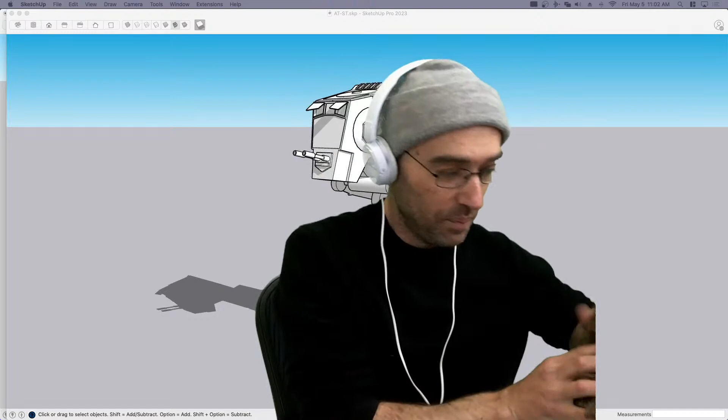We already have a lot of people in the chat here with us. We got people from sunny places like Syria, rainy places like Vancouver - is that Portland, Transom? Welcome Oregon, Transom, you're always our friend from the rainy Pacific Northwest. Anyone else we know? Some new faces, Washington, we've got all kinds of people. Matt's here - there's a lot of familiar faces in the crowd today.

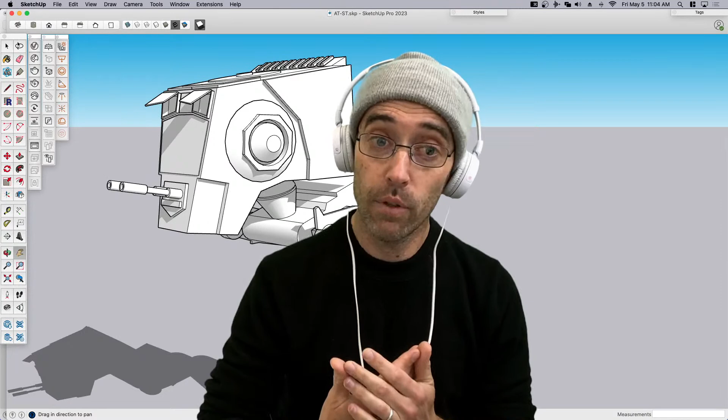So this is what we're going to do - we're going to pick up from here. And I'm less of a traditional modeler, more of a storyteller. So what I want to do today is create a scene inspired by Return of the Jedi, because this past month was the 40th anniversary of Return of the Jedi's theatrical release. So I'm getting old - I remember I was born, I was young, but I was alive when that happened.

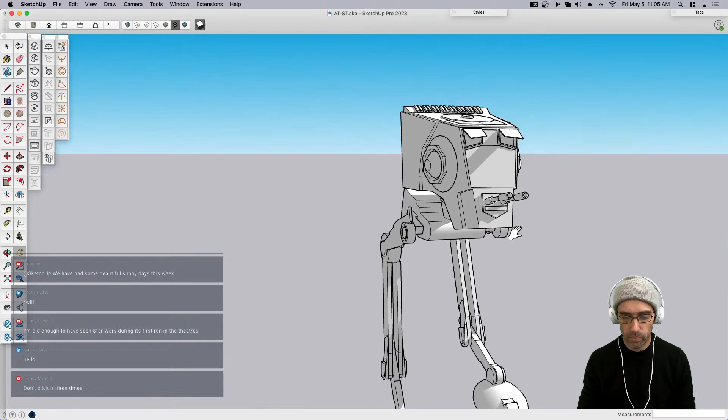So let's see, where do we want to start? Some people coming in from Mexico, Ethiopia, Iran - we have an international audience today. Randy on YouTube says, 'I'm old enough to have seen Star Wars during its first run in theaters.' Whoa.

Yeah, I did want to catch the re-release. They did release Return of the Jedi in some theaters, and leading up to this, I watched A New Hope and then Empire Strikes Back. And then I hadn't gotten to Return of the Jedi - I guess part of me was like, I don't want to watch it on the small screen, I want it on the big screen. So I'm still hoping I can do that.

Hopefully today just kind of re-energizes that passion to go out and make that commitment and get out of the house for a little bit and go do that.

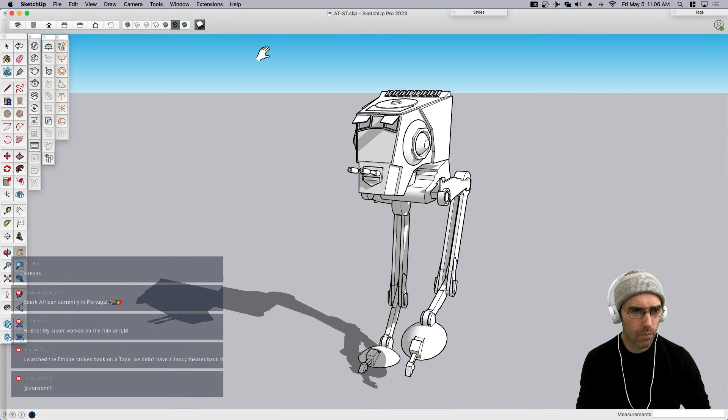Oh, that reminds me, I was going to say this. For those that don't know, I actually wanted to go to film school, not realizing you don't go to film school to work at ILM - you go to art school, engineering, landscape architecture, or architecture. Because those guys, when you watch documentaries of Industrial Light and Magic in those early days, I just thought that's got to be the most exciting job. I also graduated high school right as the Matrix was coming out - Jurassic Park already out in 1993, Toy Story '95, the Matrix in '99. Computer graphics by that point had pretty much taken over by the time I graduated high school. So my dream to do it the old school way, like those real rebels, the ILM folks, yeah, didn't get to do that.

But anyway, that's why I get to do it here, get to do it with you, get to do it in SketchUp. Keeping the dream alive, keeping the dream alive.

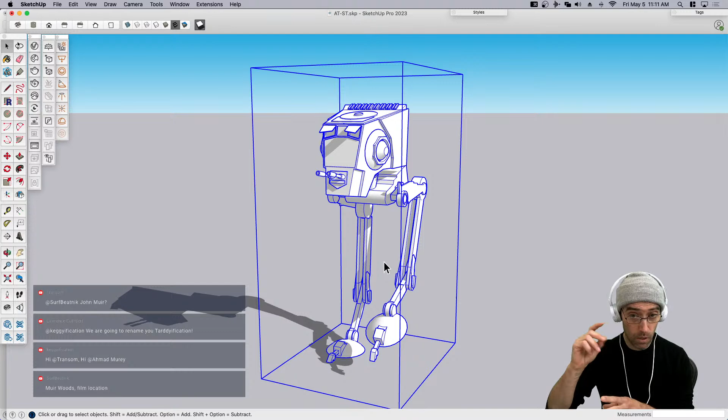But one thing, especially when we go to rendering, is that we're already missing materials, and I thought about that. I want to show you a couple of quick tests, I want to see what you think. And then I want to show you a different method I thought about in that hour leading up to this stream.

So let's do this, let's start by copying a couple of these over. The reason why I'm starting with rendering is because it's going to tell me how much work I need to do to get this model ready, so I can check that off the list and then move to the environment.

I want to start with Aaron's model out of respect for the fact that we're carrying his work into this stream. So there you go. In V-Ray, for those that don't know, the latest version of V-Ray moved their materials into Cosmos, which is their cloud library. So I'm going to type in iron.

I remember that's one that I used in the past, and there's one called Iron Dirty. What I want to do is import that, and now I just click on that. Now it shows up in my V-Ray window, so when I go to my asset editor, it's going to show up—and there it is, Iron Dirty.

So I'm just going to right click and say apply to selection. And there it is, Iron Dirty—it's applied. Now that was fast, that's literally quick and dirty to try and add like a metal texture to this.

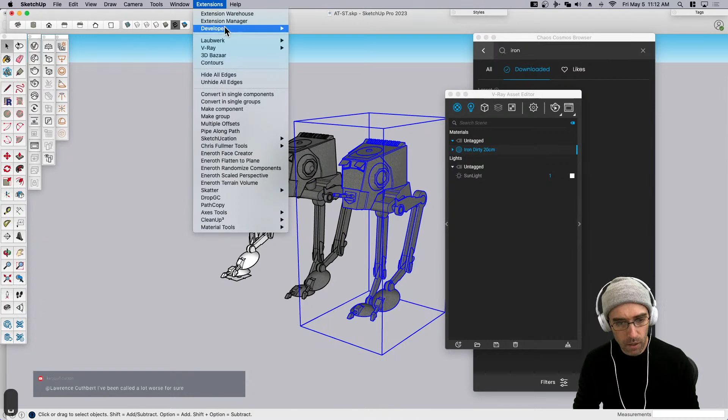I want to try one more just for comparison, just to kind of see. I'm not quite sure what's going to work, and I'm not sold.

I'm going to use my extension—one of my favorite extensions actually is ThomThom's Material Tools. It's because I can just click remove some from selection and it wipes everything out. It doesn't matter if it's got 100 materials nested, it just wipes everything out. I do that all the time when rendering—I just wipe out whatever's there and reapply it myself. Pro tip, all right.

Over here, if I type in just metal, I know there's some metals that are weathered. I want to find something that's kind of weathered a little bit. Like here's one and here's one. I don't know what's going to work, let's just try it. We have this selected, you'll notice I pre-select this before I even choose my material, so then I can just come over here and say apply to selection. That's how fast I can apply material. Let's see what that looks like.

We got some clarification in the YouTube comments saying that the film was in Muir Woods. Am I saying that right? Muir? Yeah, Muir. John Muir was kind of an explorer, pretty instrumental in the West for outdoors and hiking and trail stuff. Okay, so I want to match a viewport. Sorry, it's hard, I'm thinking and talking at the same time. Yeah, love it, keep those facts coming.

What I'm doing is I have this little standard setup in V-Ray. Whenever I have a blank file, I'll come into global illumination, expand the advanced settings, turn on ambient occlusion, maybe bump that up if I feel like pushing it for something more stylized. Then, unless I know what my composition is, it's easier to match my viewport than to have something different from it. Lastly, I bring my quality slider down, turn my denoiser on, and switch the denoiser preset to mild, so I do 2 or 3. I just do those 3 things every single time I set up a V-Ray.

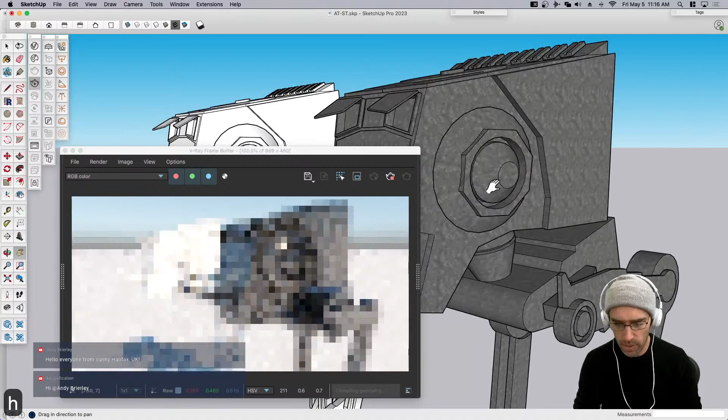If I come over here to this iron material, these are the best ones I could think of without spending a ton of time. This iron material is kind of cool—same thing, it's a little dark, a little smooth, a little too shiny. We can pull that back if we wanted to.

What I wanted to do is make the case that beyond these two metals V-Ray gives you, to do this properly we'd go to Substance Painter or something like that. But we're not going to do that today. If you look at the movie, there's all kinds of cables and cords and bolts and things that Aaron wouldn't spend time modeling.

So right before this stream I thought, is there a way I could shortcut that process? I watched a YouTube video of a guy painting a physical model, showing how to paint it, and I loved that grunge—the streaks, the little chipped paint, that weathered look. So what I did is I just cheated.

I did a screenshot of the front of it, then another screenshot, and matched it up. I essentially took an elevation view of Aaron's model and lined up the screenshots so you can see what that looks like. If I pull up in this image, there's the leg, there's the texture—just me grabbing a screenshot from a physical model and positioning it, aligning it with where it would sit on Aaron's model.

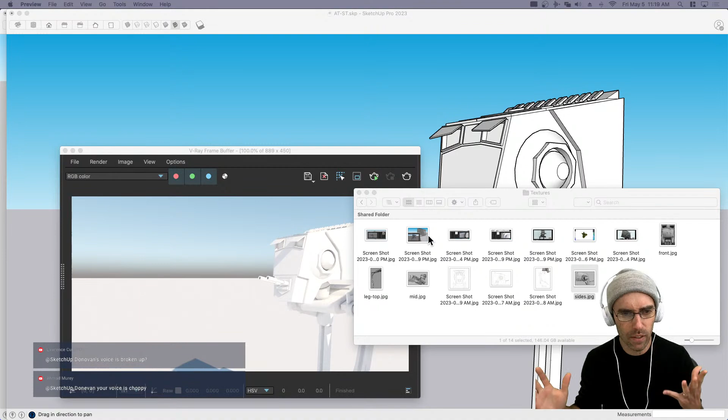What did Aaron say—is he giving me a hard time already? I'm just getting started. I think he's giving himself a hard time—he was saying it's a shame you don't have a better model to work with.

No, I'm saying this is perfectly fine, but to render, we need more information. For rendering, more is better. For SketchUp, for modeling, usually keep it light and nimble—rendering loves more detail. So I'm spending way too much time on this.

I just want to get into this, wrap this part up, and get right into modeling the environment. So here's his same model, and let me show you what I did to it. I just took those screenshots—I don't think it's great, it was just using the parallel projection.

If you go in here, turn your hidden geometry on, right click it, and say texture, texture position—there it is. All I did was take that same screenshot, line it up, and scale it best I could. Does it match perfectly? Of course it does not. But from a distance, if this is going to be in the back...

Let's render that really quick and see what that looks like. So you can see here's that render now. If that's going to be in the back, I don't know—I think it works, I hope it works. We're going to use it anyway.

So Aaron, what do you think—is that okay? Do I get your permission to use it, to go this route? Okay, I'm going to go this route anyway. I hope I get his permission. So that's it, we're going to go for it.

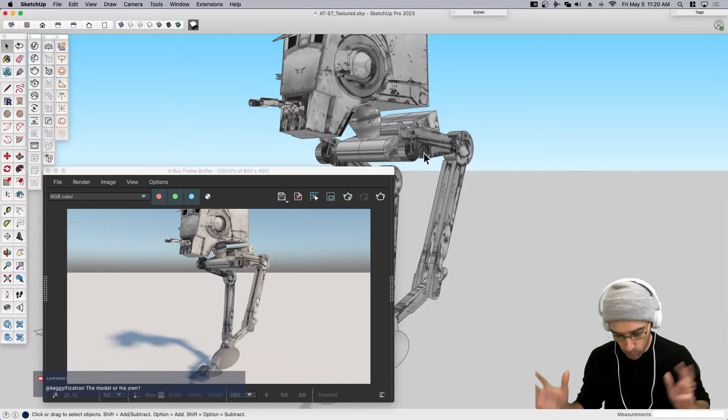I'm going to close V-Ray for now—we're going to pop back into that. So we need to think about, again, I haven't done any thinking, that was as far as my thinking went. The other thing I did was I grabbed some stormtroopers, which we're going to get to in just a second.

So if I go to 3D Warehouse, there was a file here today. All I did was grab some stormtroopers because I wasn't going to model those. I looked around, and to be honest it was kind of hard to find good ones. I found a few, got the scout trooper, a couple of scouts, a couple of stormtroopers, and one that's a desert trooper. I don't think he needs to be in the scene, but they did put him here. So, yeah, okay.

That's it, I'm gonna come back to these when we need them. That's all I did. I haven't done any pre-prep. I have no idea how I'm gonna do this.

Field of view, let me double check this. 35, that's good, but I like to work a little wider. I'm gonna push that to 50 for right now and just see what that does.

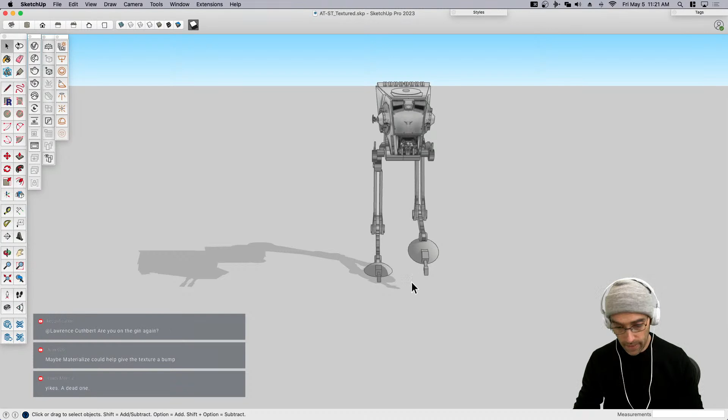You can see that. So I'm gonna start with creating an environment for how big of a scene, assuming that the chicken walker is sort of in the middle of the scene. I don't know how much I'm going to need to render, but using fog and some camera tricks may be a way.

Oh, Aaron, I did add this. I added a gun, and since Aaron did such a great job modeling this as components, he only modeled half of it. I could just come into this component and paste that in place, and then that gun shows up on both sides. So I did add that, I felt like it was missing.

And so Aaron, yeah, more guns, right? More guns, this is the United States of America. More guns. That was sarcastic.

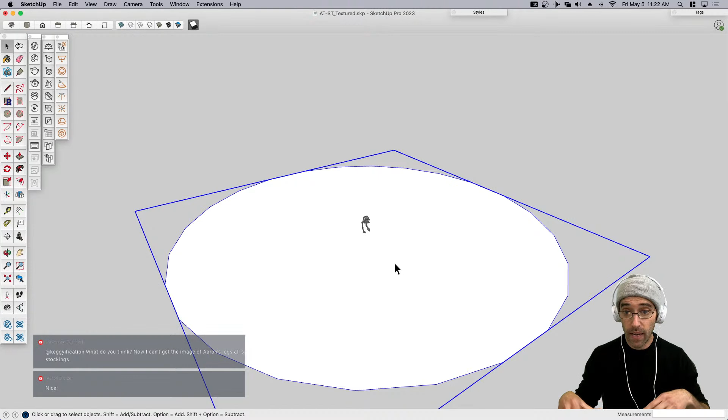So what we need to do is make a decision here. We could do the ground plane, or we could do the bunker and let the bunker set our camera position. Or we could set the ground plane, knowing we don't exactly know where the camera is, but we can start to lay some stuff out, put some trees and stuff, and then we'll know where the bunker goes.

I'm going to ask the people in the chat, do you feel like it makes more sense to do some architecture first, or some landscape architecture first? I don't have a poll, but whoever the first person who chimes in, we'll just go with that.

Okay, Andy in the YouTube chat says guns be like cowbells. Guns be like cowbells, yeah. You need more, got a fever. You need more, okay, more cowbell.

The reason why I ask is because we're going to take two different approaches, because we're going to look at some assets. Landscape first, we're going to do landscape first. Thank you, okay, landscape first. So great, then the reason...

What we're going to do is start with something some of you may be aware of: there's a really great asset for photorealism called Megascans bridge. Megascans was actually purchased by Epic Games, so they can link these really high quality, photo-scanned assets. They're scanned in the real world, cleaned up, given all the PBR material maps, and put into their library. If you use Unreal Engine, you can use these for free.

And I used to have an account, so I think I have some credits still. I have an old account from before Epic took over.

So what I want to do is look at things like surfaces, which are materials, and things like assets. I really like these ground scans. So somehow I want to filter - sometimes you can go by collection, sometimes that's the best way to find things. I'm looking for a forest, so I'm going to scroll through these here and see if there's something like a forest. You can see there's some really deserted sci-fi landscapes, a scary bathroom...

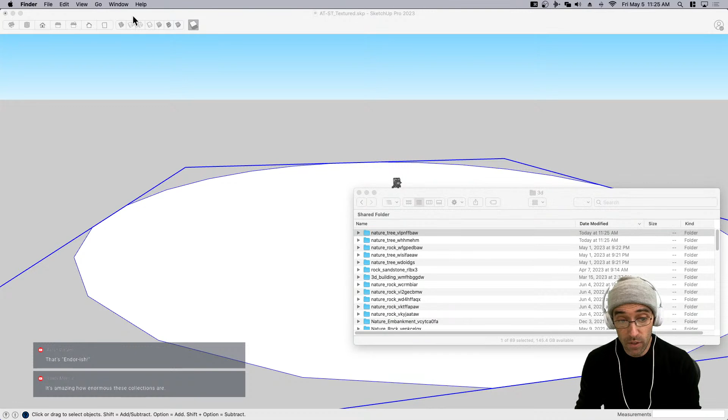So this is kind of fun, because I get to share, for those of you who haven't used this process, Megascans come in as FBXs. An FBX is not something that SketchUp typically deals with natively.

So I'm going to come over here and open this up. It's asking me, first of all, what level of detail I want. The level of detail is the amount of polygons in it. Now, each of these are pretty low detail, and the reason why is because the materials do the heavy lifting.

If you look at the materials, you can see that albedo texture, which is the diffuse map, is 38 megabytes. The displacement is 164. The materials are doing most of the work.

So what we're going to do is just grab the highest level of detail and drag that right into Transmutr. I always have to tell the up axis to change, I wish it knew by default.

And then from materials, this is pretty fun. All I do is drag this in. I drag albedo to diffuse, I drag normal to normal. It depends, different models will have different things. I'll drag displacement over to displacement, and I think that's all this one has. Oh, roughness, sometimes I'll put roughness into reflection, and that may or may not be the right thing to do.

So you can see all the maps here in Transmutr know where to go, so they know how to reconnect. And then I click transmute.

It's going to ask me where I want to save this. I'll save this in this Megascans folder that I've set up. And if I go back here, there's my Megascans folder, and I should have a new one called... let's see, when was the date modified? Okay, there it is, that's the one.

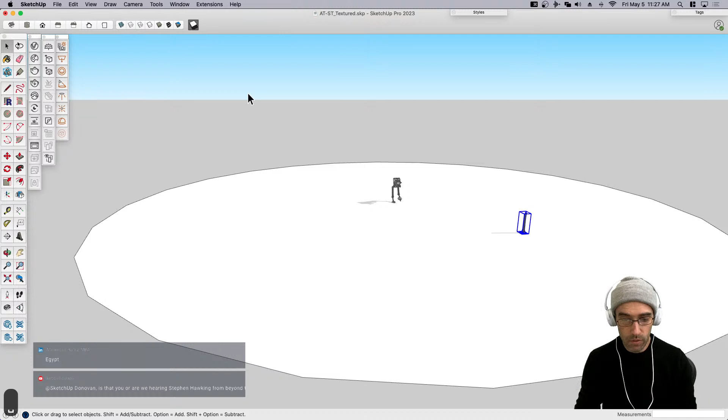What we're going to do is, I'm just going to close out of that one, and instead drag and drop that tree trunk right here. And it's pretty small, so I'm going to make this... I don't know how big that would be.

Actually, you know what, walkers are pretty big, huh? A chicken walker is pretty big. But these are big, they may not seem very big in some of those scenes, but standing next to one, they'd probably... yeah, so that's a good point.

I don't know where my scale figure is. Aaron, when you gave me this model, did you have a scale figure in it? If not, I'm going to grab a new one, and I'm going to grab my good friends, Lily and, Lily's the cat, right? And who is the, Heather. It's Heather and Lily, okay. I always forget because I remember Stacy was one.

So I probably want to have a scale figure in here for right now, and that's just going to remind me, even though these are gigantic trees, what scale we're working at. That's cool, I'm going to leave that there for now.

If I'm concerned about polygon count, I could go to Extensions, Fredo, hide all edges. For the Megascans assets I bring in that could be higher poly, I could just hide the edges on those, because the materials are going to be doing most of the work for us today. So I just hide those edges and I don't have to worry about that. I'm already all set to go.

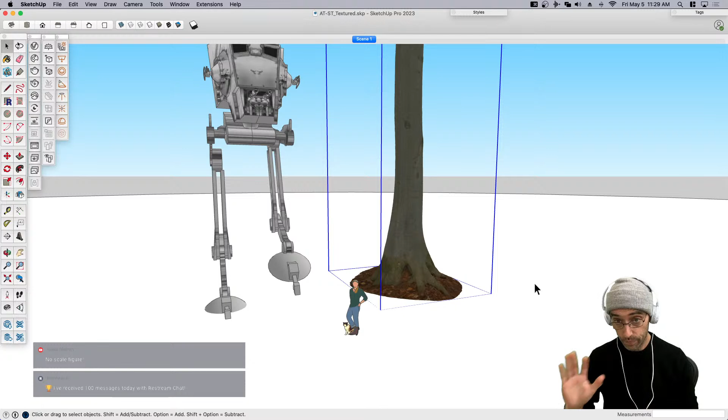Let me know if you have any questions about that process. I'm going to do it a couple times because I've got a few assets, and I've also got some that I've already made, so I won't have to do this 20 times. I'll just do it a couple times. It's kind of fun actually.

I looked it up real quick and chicken walkers are 30 feet tall. Okay, well, so I have this one - if you want to be as accurate as you can be, 28 foot 3 inches. But if I measure to the back of its head, 30 foot 10 inches. I think we're close enough. That's kind of the theme of the day - close enough.

So the other one I did was, which one did I do? Let me go back over to my desktop here, Return of the Jedi, Megascans. The one I just did was this one - I don't know what it's called, VLPN. So what I want to do is grab the other one that is not VLPN, and we're going to do that process one more time. If you didn't catch it the first time, hey, we do things more than once around here.

Oh, that was the log. That was like a cool snag log. This is going to be sweet. I'm excited.

Yeah, I don't know about you all at home, but this is the kind of stuff where when you're at night listening to some music, like I've said before, you just get into the Zen mode. I don't feel like - some people are like, oh, you could use AI to do that and it'll just do it for you. And it's like, I don't want AI to do it for me. I'm old enough now, I'm old curmudgeon enough now that I can say no, I like to do this. This is part of the fun for me.

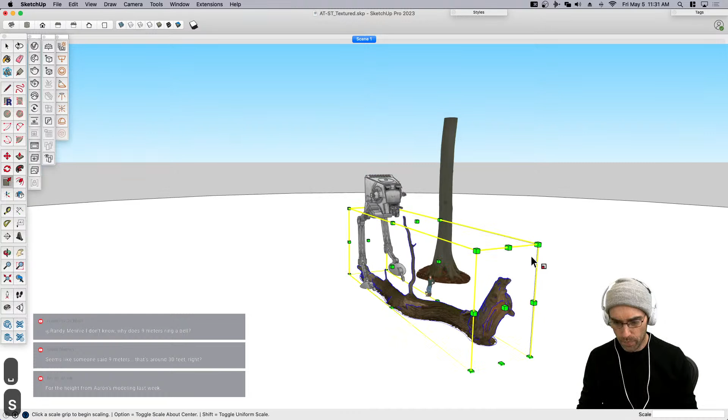So there's a cool little snag there, I think that's cool. I don't know what I'm going to do with these, and you've seen the process. So what I'm going to do is just grab a few more that I've used in the past that I already have available. Let me come over here and see what I have available.

I have a fern, so I'm going to drag and drop a fern that I got from Megascans. Again, I don't have to use Megascans - you could use stuff from 3D Warehouse, or purchase stuff from libraries. I'm probably going to do some stuff from, I may even use - I have Laubwerk plants. So I might check really quick to see what might work for a Laubwerk plant. If they have anything that looks redwoody or really tall, almost even a pine tree in the background, that could work. So let's save that.

So right now we're just in the asset gathering phase. I know we're half an hour in, but we've got the textures on - we've modeled, or should I say added the textures to the AT-ST, and now we've got some really high quality assets. I'll do a little test render in just a second of what that looks like. So let's open up - Tyson chimed in and said, kudos, Eric.

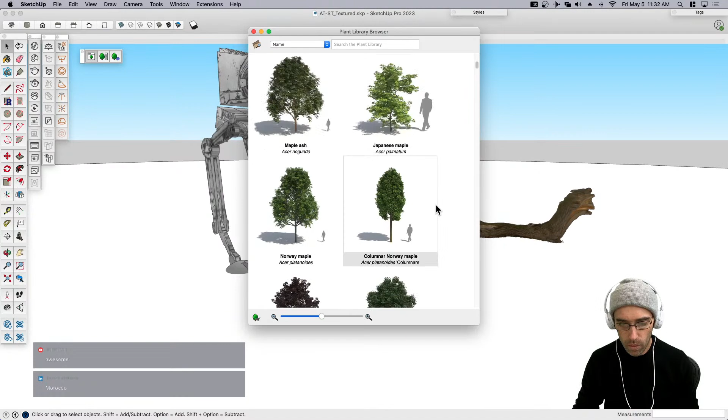Every time you break out the sub-rendering apps, Quixel, Transmuter, Scatter, etc., it feels both overwhelming and awesome. Kudos on knowing all the stuff. Also, you're looking super hipster today.

Oh, yeah, you like these? I was worried about the AirPods causing a sync issue with my mouth, so let me know if we're still okay. I'm going to be DJing after this later if you guys want to. If you're in the California Central Coast, you can hit me up. I'm kidding, by the way. That would be cool, I wish I was not kidding.

Let me see, I'm looking through. So this is Laubwerk, a German company. I've met one of the, I don't know if he's the owner or the founder, but Timm — Timm with two M's because he's German. Shout out to Tim and the Laubwerk team for doing some really cool stuff.

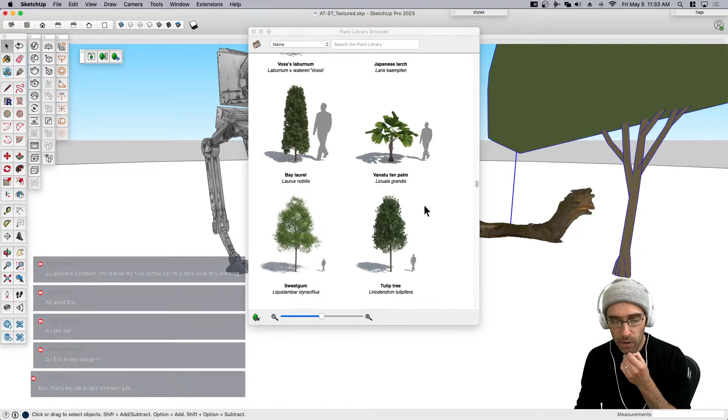I'm looking for something tall and slender that gives a nice canopy, maybe this mahogany could be it. I also want to see if I can find something reminiscent of a redwood, but I don't think they have one. They have this Scots pine, which could be good, so I'll grab that. I know that's not the right thing, but we're rendering — we're being creative. Lastly I'll go through these; I don't think they've got any ferns, but that's okay, we could come back later and fill in gaps if needed. There's tons of stuff between 3D Warehouse, Megascans, and Laubwerk, so we should have our bases covered.

Okay, so you get the idea. Now I just want to say something cool about Laubwerk. If you don't know this, let me check my window settings real quick — my shadow settings, I like to make sure that my...

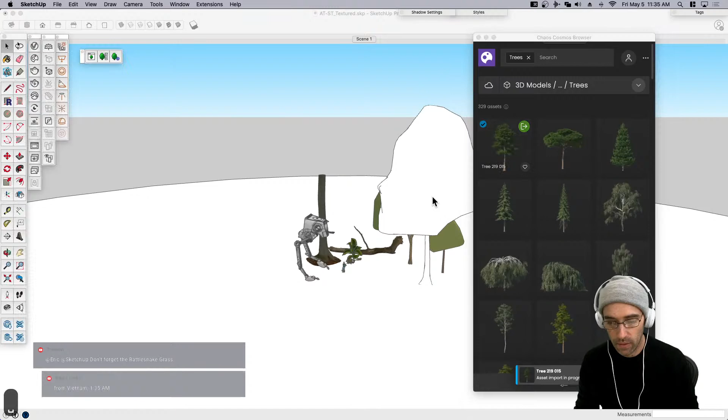Here's a tree right here that I think could be cool, I'm going to pop that in. I don't know if it downloads it first and then asks me to put it in — there it is. I don't know what's going to work best until we get in there, but I want to give myself a few options. I don't want just one tree repeated over and over, but you can see, like in this case, here's a really tall, kind of skinny pine. That one, import that one.

From the comments: don't forget the rattlesnake grass. Rattlesnake grass — wait, was that a reference to something, or is there something actually called rattlesnake grass? I don't know. If it's a deep cut in the Star Wars universe, it's deeper than I'm picking up on, so maybe it's more practical than referential.

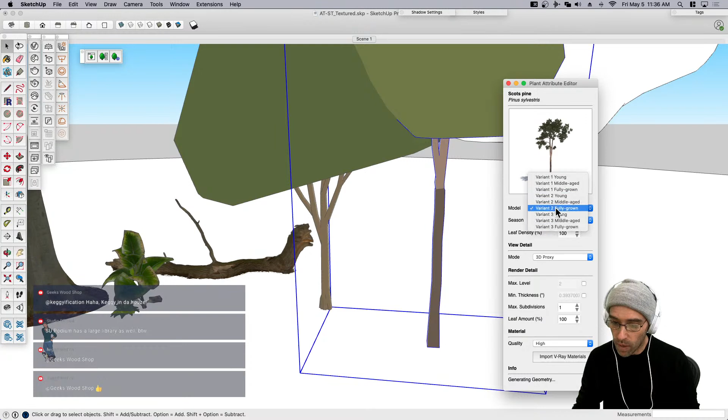Laubwerk — just finishing this thought because otherwise my OCD won't let me move past it. Laubwerk is cool because one plant, if you don't know this, actually has three varieties: young, middle-aged, and fully grown. So when you grab one plant and put it in, it previews each one for you, and you can see that little preview change and decide — okay, is that what I want, is that the shape I want? So imagine having this same plant copied a bunch of times.

Well, you can give it that variety by saying, no, I want these different versions. Something new to Laubwerk plants is that the canopies used to always be green, but now when you switch to something like fall color or winter - if I switch to winter, I don't know if it's going to work here because this is an evergreen, not deciduous, so the color stays green in wintertime. But if it has fall color or spring flowers, the canopy color does change in SketchUp to tell you that. So when you render it, it's going to render as fall color. I think that's a really cool feature, and it makes it a little easier to visualize what you're doing in SketchUp.

Because remember, it takes - we're going to go on a mental journey, a journey of the imagination. If you've seen Cosmos, the show Cosmos with Neil deGrasse Tyson.

Let's see what these look like rendered. I don't know, I've never used these trees, I don't know if this is going to work. We're just going with it. I said I was going to do some more modeling and then render, but to be honest, it's really a back and forth. You'll notice I'll do something and then have to change it, and do something again.

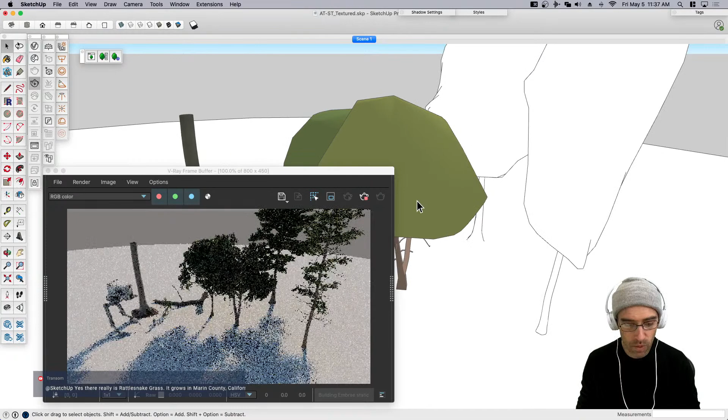Okay, so it's going to play catch up. This is where things - Studio Art is saying that Podium's library as well, by the way. And then Transom, Chambacus - there really is rattlesnake grass that grows in Marin County. So there we go, okay.

So if I take a quick look at these, I'm going to zoom in. It's going to take a little while. These are really heavy, so these might be something I'll turn off or something like that. They'll be a little dark, but we can work on that when we get into the render settings and add our lights and stuff. But you can see, if I zoom in right here to the trunk, you can see quite a bit of detail.

So let's stop that there. I think we're just going to riff. We're riffing, we're going with it. Zoom out, save it, okay.

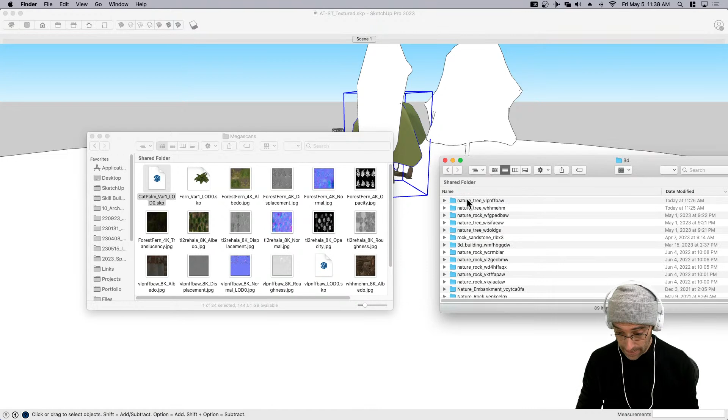Now I need to create a path. Now I have these things in my ones that I've used before, so these are not ones we just downloaded together. If I go back to my Megascans library and go to downloaded 3D - how am I going to find this, that's going to be the problem - there's these ones that are like grounds, like forest on the ground. If you look at this, let me open this up - this is kind of what I'm talking about. It's not a tree, it's not a texture, it's a scanned part of a ground. I think this kind of stuff will go a long way to really help our scene out, like branches and fallen leaves and rocks and gravel and all that stuff.

So if I have that as SketchUp, if I've already transmuted it in the past, then it makes sense that I would save that so that work transmuting it is only done once. And there it is. I think if you saw my last Star Wars stream, I don't know how long ago that was, I may have done something similar. That's kind of cool. I already have a dead log, so I'm gonna...

Yeah, that one's good, I'm gonna grab that one. I don't need too many because it's really just more in the foreground. So you can just copy it and paste these around. Let's see, maybe if I have one more at the ready I will use it, and if not I won't - yeah, let's just use it. If we have another one, moss ground. Yeah, let's go with mossy ground. Let's go mossy.

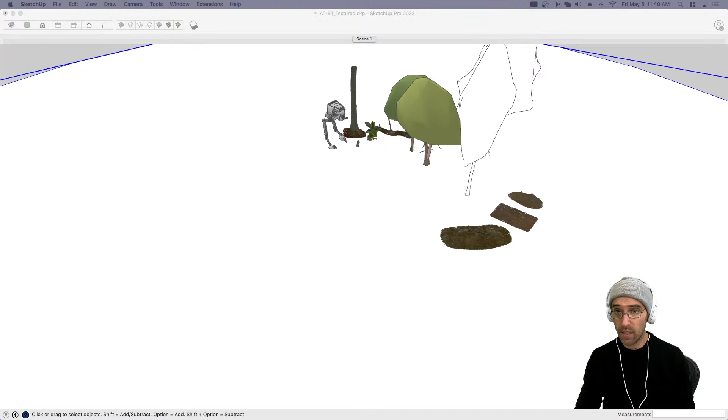Okay, so I've got my ground stuff, I've got this. Now what we need to do is figure out what I want to get - it's the last thing I want to get for now, and then we'll add some more stuff towards the end. I want to get, you can see in this image there's a boulder right here. So let's just find a boulder from Cosmos, just because I think that'll be easy. So if we go home, and then go - I don't know if it's rock or boulder, I don't know what will show up. Yeah, oh, I don't know if I like those ones. I might want a mossy boulder instead.

It would fit the environment. Yeah, I've got rocks. Problem is that some of these rocks, I just need a better way at figuring out quickly what everything is. Do you know what I mean? When you download them, they all show up in their own little folder, and you don't really know what anything is. I'm looking for a mossy rock... that one looks good. We could just go with that one. And I've already transmuted that one.

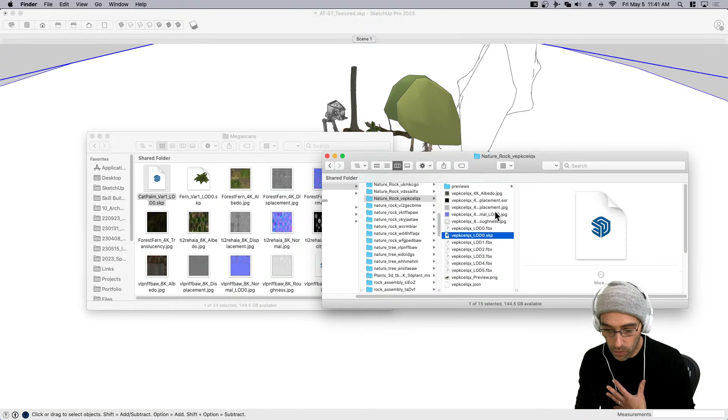All right, we're gonna call it there because we want to move on, keep this show interesting. Now that may be too many rocks. That's okay because I can just push it under the surface. I think it's already pretty interesting, so you're good.

Okay, thanks. So I'm going to start by giving a texture to this ground. I'll use a V-Ray texture for now. I want to give a texture to this ground, so if I type in, I don't know, how would I find ground? Let's just see what happens and see if I can find something that looks mulchy, like dried leaves, or maybe this one. This one could be good.

I'm going to import that in, and apply it to this ground plane here that I have selected, so I'm just going to say apply to selection. Sometimes it helps to apply it to a surface. I tend to apply things to the outside of groups, just out of habit, so whether that's right or wrong, most of the time that works okay. Sometimes there's reasons why I don't want to do that.

Okay, so let me see if I can edit this and enlarge this texture. And if not, that's okay, let's see if it remembers that setting or not. There it goes. I'm gonna make that a little bit larger so it doesn't feel like it's so repeating. All right, done with that. So we've got our ground plane texture and we've got our assets.

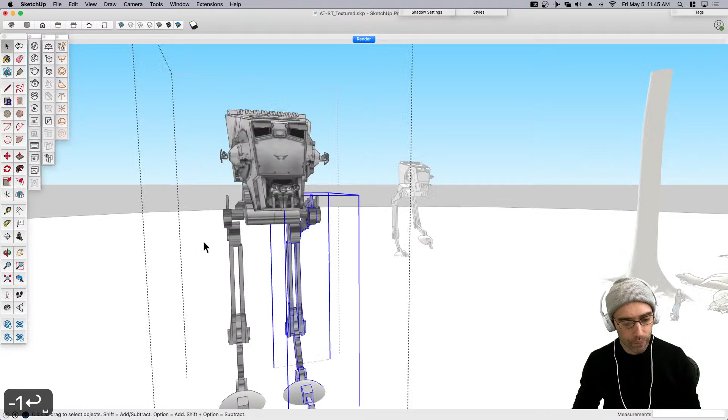Okay, is that right? Yeah. Like most of the things we do in SketchUp, today is going to be the day of close enough. So we're going to go back to that render mode, and turn this one so it looks like it's just come into the shot. I kind of want to turn it there, but it's probably not going to work that well, so I'm going to fake it. I love this because you can't really see, so I'm going to just make the legs further apart than they really are, just because we're having some fun.

Oh, I moved my dock. Move back, go back. There you go. Go back, dock. And we do have comments coming in from Facebook and LinkedIn as well.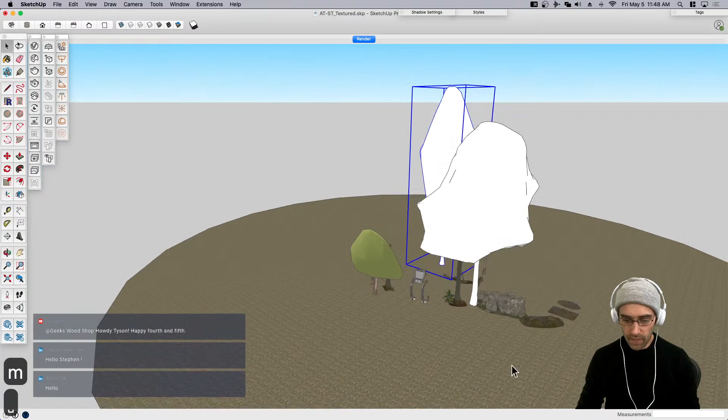Now this is going to be kind of fun here. I know I made this big circle, but if you think about it, my camera shows up here. I had this idea, I was helping someone on the forum the other day, and they were talking about gravel. They said oh, it's too much gravel, it's crashing my machine, it just can't process that much. And I said, well, what you can do is come over here to camera, come over to tools, advanced camera tools, and create a camera.

So what I'm going to do is create a camera, and it's going to ask me to create a new scene - that's this camera's scene. Then from here I could come over to tools, advanced camera tools, and show the camera volume. Then when I switch back to this scene, if this worked, you're going to see... this is where I forget. Okay, that didn't work. Okay, that's my camera. Maybe I have to add a scene. I forget. So that's that camera.

Let's try this again. I forget why it doesn't do this. Camera, advanced camera tools, I keep going to camera. Advanced camera, create a camera. And then I want to show - correct me if I'm doing it wrong - I want to show the volume. And then I want to make sure I'm looking through the camera. So I want to look through this camera. Okay, so the question is how can I rotate and still see that camera? What am I doing wrong? I swear I've done this. Show the volume, show the camera volume.

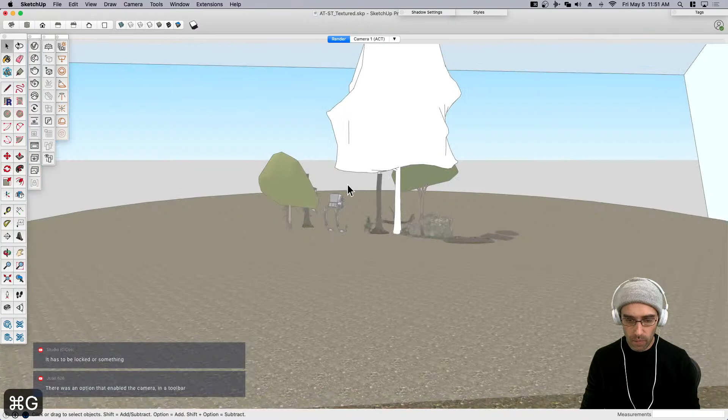Okay, hold on, from YouTube chat - it's an option that enabled the camera in a toolbar. What was the comment? It was an option that enabled the camera in a toolbar.

Yeah, so what it's supposed to do is... sure, if that helps. Yeah, anyway, sorry, you get what I'm saying.

What it does is, if I use that camera volume - which is, half the time it works, half the time it doesn't, so I shouldn't be demonstrating something until it works every time - but what it does is it shows the camera volume, so it shows exactly what's in the scene. So when I move around and work on different parts of the scene, I don't have to be working in the camera view. I could be working outside of it and know exactly what shows up and what doesn't.

So if I'm going to start scattering some things, what I'm going to do instead is back up a little bit and kind of fake it. I think this maybe shows, and I think my camera is here, and that maybe shows. So definitely don't need all of that ground plane, but that's okay. If I go back to my render view, I just clicked on that, grouped it, copied it, deleted it, pasted it in place.

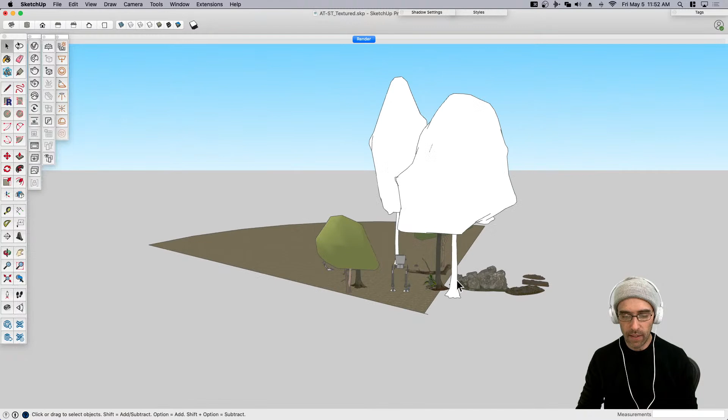Now, what I'm going to do is scatter some stuff, and in order to do that it works better... what am I doing? Okay, that I want to delete. There we go. So the point is that when I go to scatter something, you don't want to scatter more stuff than you need - you want to kind of keep it limited to what shows up.

So if I look left, you can see my field of view stops left. If I look right, my field of view stops right. That was the manual way to do what I was trying to do with the advanced camera tools, which will actually show the camera volume, so you're not just guessing like I did - it's actually correct. So what I want to do is scatter some stuff.

I want to scatter some of these trees around. So the first thing I want to do is just kind of make these trees... oh, you know what, here's a little trick - no, I'll do that later, we'll just scatter some stuff.

Scatter is great for rendering. So if you don't know scatter - view, tool palettes, scatter. Scatter is great for landscape, because it does exactly what it says it does. It's actually by the same developer that made Transmutr, which is what we use to get the Megascan assets in.

Speaking of Megascan's assets, I kind of want to place this giant rock formation - make sure I don't forget about that. I'm just going to have that sticking up somewhere in this foreground. We'll see, I don't know where that goes.

Okay, so with scatter, I need to figure out first of all what I want to scatter, and second of all I need to also think about what I don't want to scatter, like where I want to avoid things. We'll come back to that, I'm not ready for that yet. I think what I might do is just place some trees manually, and I'll use scatter for the small vegetation, like the ferns.

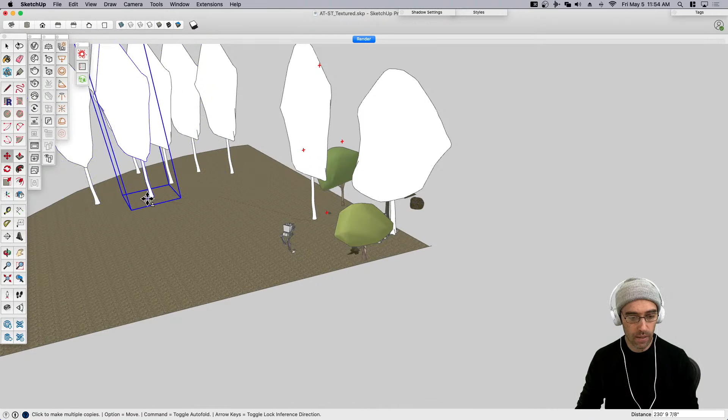The stamp tool, by holding the modifier on move twice, gives you the stamp tool. This is great for creating some pretty quick variety. Like I want to put all these trees in the background, so I come over here, use that stamp tool, and stamp a few of these. I'm trying to keep them out of the middle ground where the pathway is, because that's where the bunker and stuff is going to go.

You could use scatter for this, but I found that if you're just going to do a small area, it could be better just to do it like this, because it gives you a little bit more precise control. Otherwise you've got to go into the scatter settings and say scatter here, don't scatter here, change this.

You know what I'm saying? Know what I'm putting down? Yep, up and down. All right.

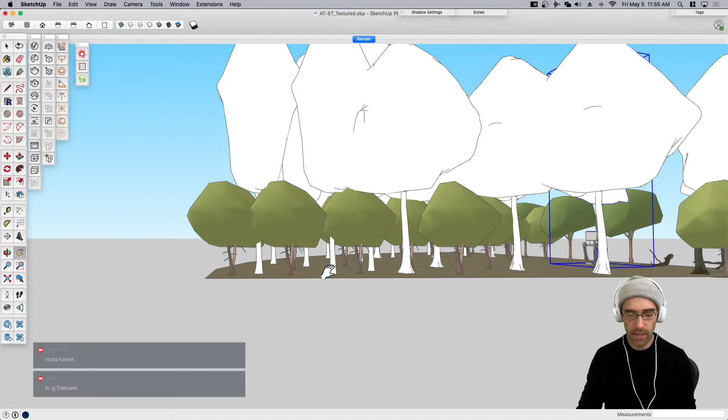So the other thing is, now I just copied those. Some might be able to pick up that these are slightly repetitive, especially when you look at the way these little tree trunks are sticking out. So I could select all of these - and I definitely don't want to select my walkers for this, I just want to select the trees.

What I'm going to call the low tech, or low budget, or poor man's scatter, is going to be called Chris Fulmer - he has scale and rotate randomly. Scale and rotate randomly works really well for vegetation, because you can just click scale and rotate.

I want to shrink some of them down by like 0.9, and bump some of them up by 1.25. Then I want to rotate some of them - let's scale about the center just to be safe, because sometimes you don't know where the axis is. Minimum rotation, I want at least 30 degrees, and maximum I want to go 330 degrees, so we leave a little window where maybe they don't rotate.

Click OK, and you can see what happens. If you look right here, it doesn't look all that different, but you're not getting the same canopy direction over and over again. And even though it's subtle, you're starting to see that the heights vary even just a little bit.

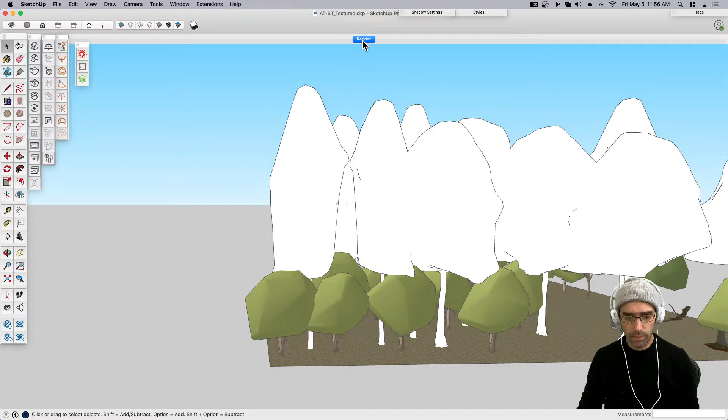So the one that has the most detail, the Megascan one, I'm going to place in the foreground. I'm also going to place things specifically to block where my ground plane starts to disappear, so that's an easy one to just pop a trunk in right there.

And then I can use the drop extension. So if I see that some of the trees, for some reason when I placed them, are floating, I just go in and use drop.

So this guy's over here - I want this big trunk, like this is a massive tree, even though this isn't a redwood. If I look at my reference image, there's this really big trunk between the two walkers, and the background walker almost looks like he's coming out of that. So I don't really want that tree there, I'll just move it into the background.

We're going to have some fog for this, so I'm not too worried about whether you can see the sky and the horizon for the moment - I'm going to have lots of fog and stuff for that. So I'm going to take these rock formations - I don't know if this is the right rock or not, but it's kind of mossy, I thought it's kind of cool.

Donovan, I'm just kind of in my zone, so if there's anything, if people are saying stuff, let me know. We'll hear from our friends - not a lot. I do have a question though.

Since we're doing a Star Wars project, do you have a favorite Star Wars movie or memory? Donovan's doing his Darth Vader impression, his droid impression, by the way - if anyone is wondering, he's doing that on purpose. Yeah, what are your Star Wars - we're talking about Jedi here, you don't have to stay on Jedi if you're a fan of other ones. But what about Return of the Jedi, do you have a favorite? Do you know how to put up polls? Do you want to do polls or no polls? People can just chime in.

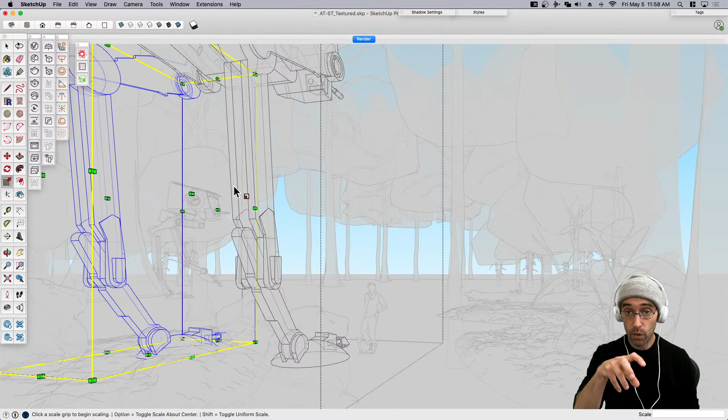Pro tip: if you're going to go into X-ray mode, you may want to turn off your materials because it doesn't have to process the transparency on so many things. I did not do that, so you can see it kind of paused for just a second. Yeah, so 0.97, 0.98.

Yeah, AI is interesting. If you really wanted to get into it, which I don't want to right now, but pretty soon, Eric, you won't have to do these live streams at all - AI will do all of it. They'll narrate it, they'll have some avatar that shows up, probably much better looking than me, and probably funnier, and we'll get to the end result way faster. But to me, that's not the point. The point to me is getting lost a little bit in the weeds and the fun that is this conversation that we're having.

So what do we want to do now? I've got this log here - where should I place this log? I'm just composing the shot.

For those that find moving objects not as interesting as actually modeling things, I'm sorry, but I really enjoy this - it's good practice, right? Using rotate, using reference, scaling, mirroring. We're using all these basic best practice tools over and over again - copying, placing, pasting in place, dropping, flipping, mirroring, all that stuff. So for me, it's a good reminder that I kind of enjoy this part of the process where I just get to place things like that. Little ferny ferns.

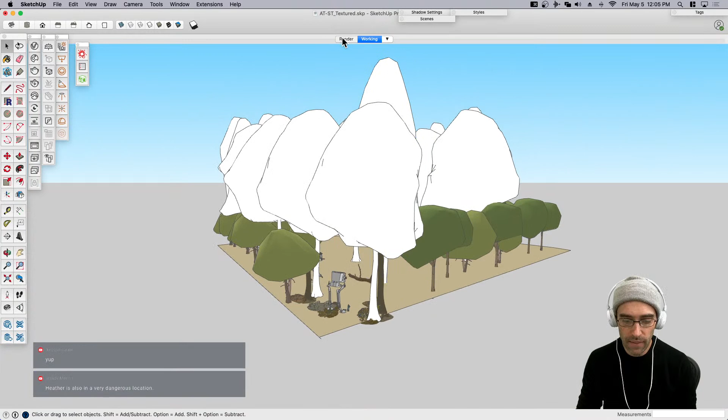I'll disable that for working, and the reason why is because I'll have a render scene that has all my textures and all my high poly stuff and everything. You can see what's happening right now, it just took a second to process all of that. So when I click to working and pan around, you can see I can get around a very heavy render-ready model quickly because I'm doing it in a working scene. If I wanted to hide some of these objects, I just hide those and save it to a working scene, so it's very fast. I don't navigate with everything turned on with all my textures and shadows. I navigate in my working scene, and all that stuff only sits on the render scene. Hopefully that's helpful for some people.

So before we go to the bunker, let's turn this bad boy around. I'm just going to go negative one, and then speaking of render, we're going to pop back to our render scene. I'm going to wait for it for a second. Okay, and we're going to come over here and try to figure out where that foot placement may be. If I open up this reference image, he looks like he's kind of facing... maybe it's just the wide angleness of it. I think it's probably about there.

I almost don't want to show too much of it because you can see that this material I put on it is not going to hold up. It's not going to hold up in court.

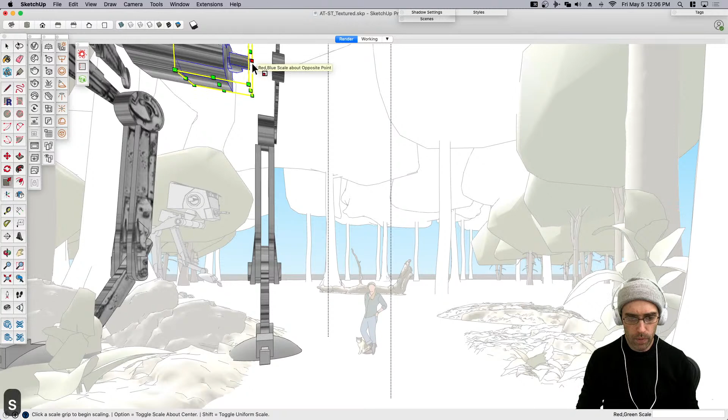We're going to put some leaves and stuff like that in there. So we'll figure that out.

Sometimes if you're having trouble moving something, I'll make a copy of it. Watch what happens if I go to move something here—sometimes it doesn't want to place where I want it to. It gives me a little bit of trouble, doesn't want to follow my cursor exactly. Sometimes I find if I hold the Alt, or the modifier option, or control, the movement feels smoother. I don't know what it is, but it feels easier for me to move and place a copy than the original. So sometimes I'll do that, knowing it's an extra step, then delete the original and go from there.

I want some leaves up here, but that's okay—we're going to do some cropping and stuff. All right, so the bunker.

I got some reference images because I had to do a little bit of planning, otherwise you'd just see me searching Google this whole time. I thought this was kind of funny because it reminds me of my childhood—it's the Star Wars, probably a Hasbro set. I thought this actually shows the bunker the best.

So what I'm going to do is save this. Pro tip: if you're going to model something that you'll then add to a render scene, my suggestion is to model it in a new blank file here, and then pop it in when you're ready.

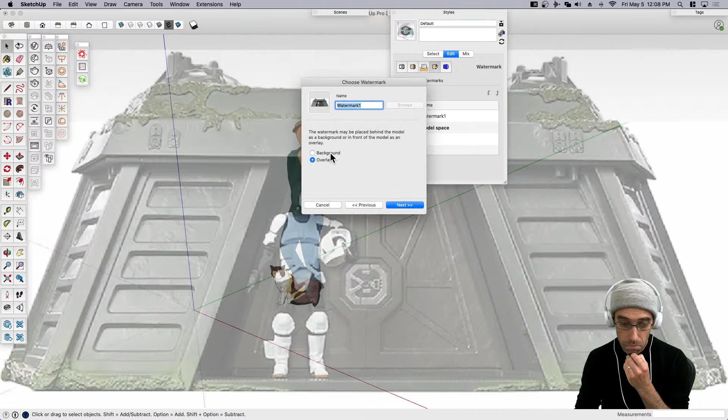I'm doing this as a watermark instead of match photo, just because match photo is going to give me a little bit more complex setup—it gives you more tools than something simple like this needs. I don't know that it really helps me.

So I'm just going to come over here and kind of align, scale Heather and Lily to match. I want her eye level—I want the horizon at her eye level, and her just slightly smaller than the dude with the beard. For the axes, I just want the red axis to somewhat be parallel. I think that's enough for me. I don't know, we'll see.

Save that to a scene and start drawing. This is kind of like a crappy version of doing it with match photo. If I put on my X-ray mode here, I can just kind of see pretty quickly—that needs to go up. I'm doing this pretty fast and loose because I could spend quite a while just doing this.

So what I may want to do is copy this—there's this little reveal, I don't know what you call it, this little part that pops out. I may want to take that and treat it independently and group it, because then I can scale it about the midpoint.

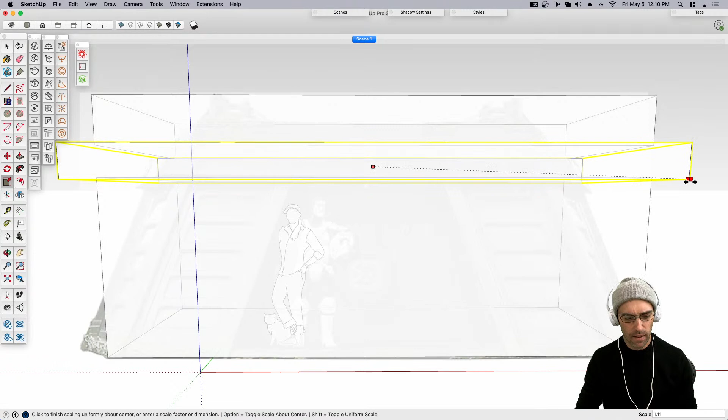And then see if Fredo Tools has Fredo Scale, which has box tapering. It may make sense that I just go ahead and model this as if I'm looking straight at it.

Speaking of which, I'm going to see if I can bring the image up a little higher, just because I'm using X-ray—I'm modeling in front of it instead of it in front of my model. You can do it two ways: put a watermark in front, or put it behind. In this case, I'm going to keep it behind, so that's why I want to bump that.

Also, don't forget to save. Don't forget to save. The other thing I'm going to do right now is save this desktop—I'm just going to call this bunker. All right, and then the next thing I want to do is intersect this with the model.

I don't know if that's going to work.

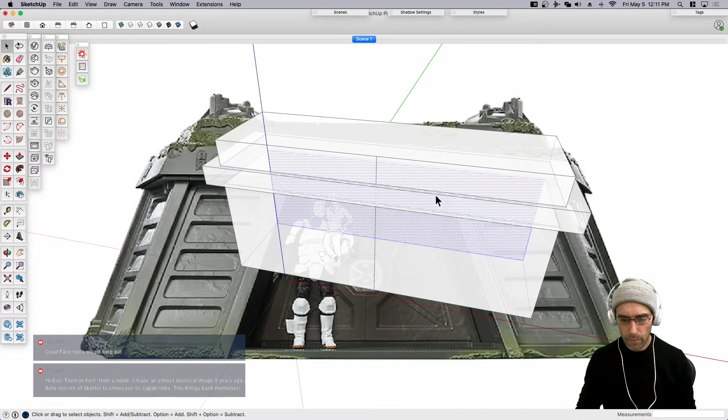From YouTube comments, you got one, Eric Thomas here from Lindale. Oh, is that Thomas from Lindale? Yeah, he's the Scatter guy, one of the Merwin and Thomas. He says... go ahead. Oh, no, they're from Scatter, so that's cool. I'd be curious to see what they're up to.

He said, I made an almost identical image 8 years ago on the first beta version of Scatter to showcase its capabilities. You know what, this brings back... I remember that, and in my head I was thinking, okay, he's going to think I'm just ripping this off. But in a way, no, this is about Aaron's AT-ST, this is about Jedi's 40th anniversary, this is May the 4th. The stars are aligning on this.

It's funny that he brought that up, because you can find it. I don't know if it's still available, but he used this image where you can scatter the ferns, and it's like a GIF that kind of builds up. That was one of the most amazing things I had ever seen. When I first saw that, I'd never seen anything like it, because vegetation has always been a little bit of a thorn in my side anyway.

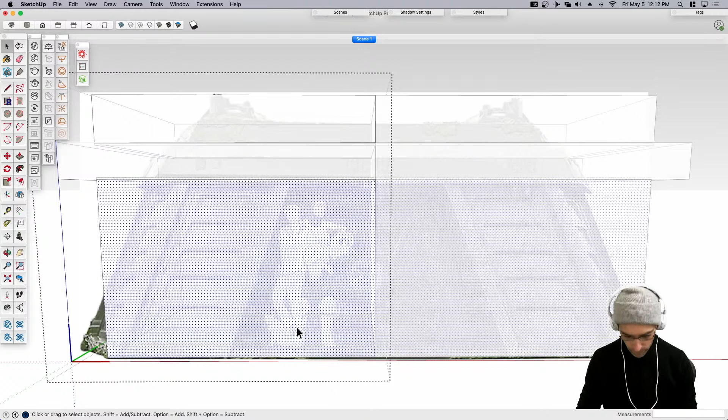All right, so I'm gonna do this here. I made it as a component, so what I do to one side should do to the other. So I push this in. I am not, by the way, like...

Oh wait, how do... okay, I can box taper the whole thing. So if I box taper the whole thing, I probably want to go back and do this as a straight line first, because I'm gonna see if box tapering works.

In fact, I may want to do a quick test. So for those who don't know, welcome, Thomas. Great to see you. I'm hoping to meet Thomas in person in Sweden at the end of this month. There's going to be a little developer meetup that I'd like to be a part of. I'm not a developer, but there's so much to learn from these guys and gals, like Eneroth.

Such talent, such awesomeness that they make these extensions. Some of them paid, obviously they need to earn a living, but most are free. I just love it, it's a great community.

So let's see, I'm going to do a quick test. If I come over here to Tools, Fredo Scale, Box Tapering - I don't know if this is going to work or not. So what I want to do is taper this whole thing. That's not tapering. So how do I taper?

If everyone's in the chat, this is why I plan stuff, by the way. Oh good. This is why I pre-plan stuff, because that way you don't have to watch me figure it out on the fly. You get to just watch me model and do it, not get stuck on it.

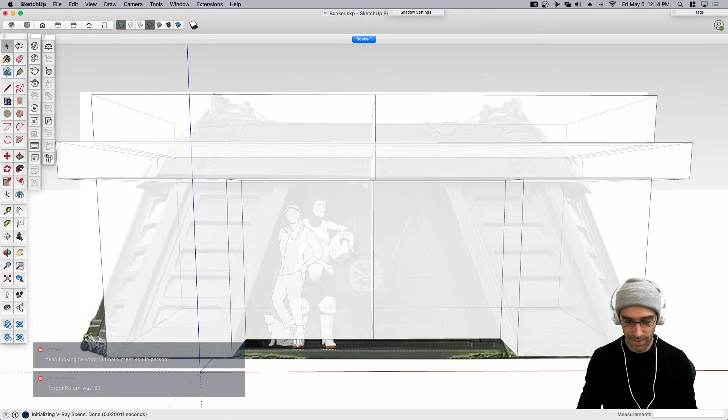And it's funny, because we do learn things when we get stuck and when something goes wrong, so in a way that's good. But I don't really like to learn in real time. I like to learn in my own time and then come back and do it, you know what I mean? I like to fail by myself. That's a good way to describe it - failing by myself. All right.

I'm not going to do that anymore. I think what I'm going to do instead is take this whole thing - maybe I don't need a box taper. Maybe it's just something as simple as pulling that in, getting that in, and then coming in here and just pulling that in, right? Again, we're just guessing at this point, we just need something.

All right, and this looks a little high, so I could take - because I moved it, the push-pull tool might not work, so I may have to just use the move tool instead. It's kind of cool, because in a way the move tool and the push pull tool kind of do the same thing. All right, so what do you think?

We need to do these little panels here, this little reveal. That's easy, I think that's just going to be an offset. So I'm just going to offset that, push that back in, and then offset that again, just to give that sort of detail.

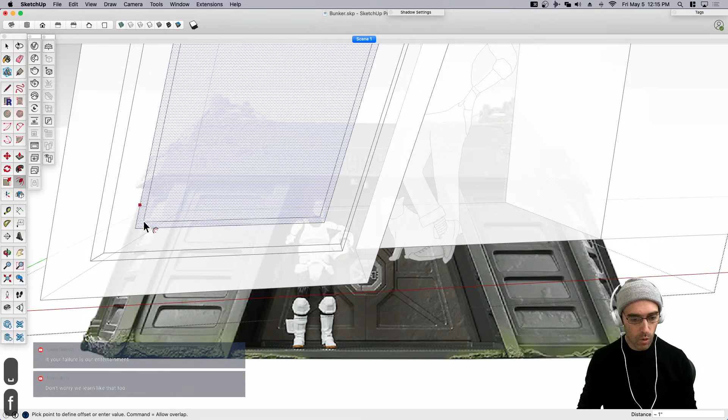Oh, you know, if it's distracting, I could set up a window style - I could just create one where I turn watermarks off, then add a new one, come over here to Scene 1, and say change the style to no watermark, and then update that, add a new one. So what's cool about that is, I said add, not update.

So here's what we need to do: I need to figure out how many of these there are. There's 1, 2, 3, 4, 5 of these. I know they're not exact, so I'm probably going to just put like 3 of them because at this point the proportions are off.

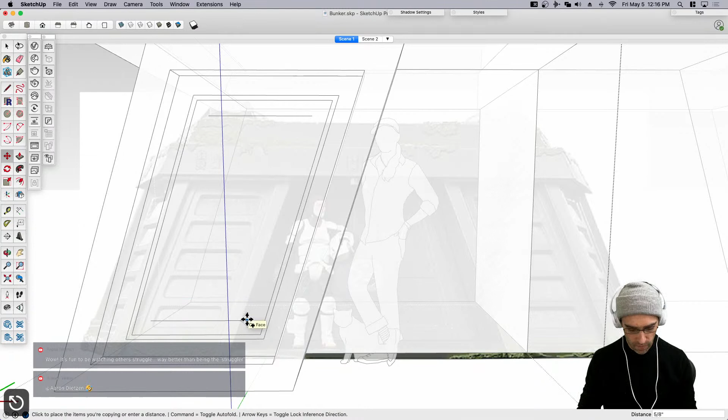What I need to do is figure out what's the spacing for these, so I need to build one of them. This is actually a technique I have a Campus course coming out soon on, where I teach how to model an existing building from just photos like I'm doing now. It's a lot of counting things like, how many spaces is this? How tall is this? How do we work backwards? So you end up using the divide tool quite a bit.

So if I come over here and say, there's that, and then what I need to do is, there's where it stops. Now I need to figure out how many of those fit equally. So I'd just come over here and say, well, if I divide by 4, that's the spacing I get. Divided by 3, that's the spacing I get. Divided by 5, ooh, that's pretty tight, I don't really like that. I think 4 was probably the best spacing.

And I'll just kind of push that in again. I know it has rounded corners, and I could round those corners, but I'm flying pretty fast and loose.

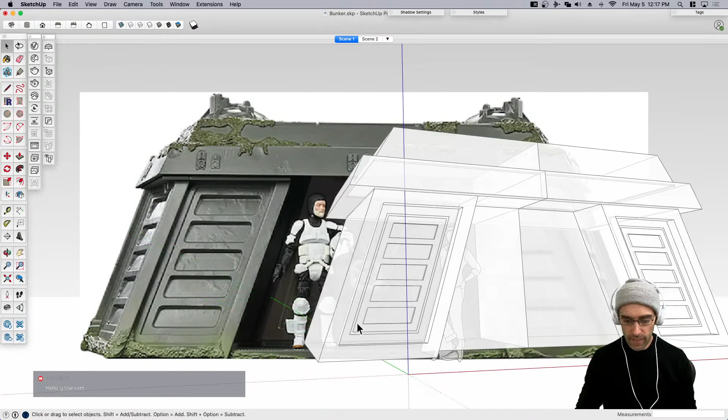Okay, so what do we need? We need to do the same thing on the side. If I was smart, I would have done this already. Let's see, I'm just going to have to figure out what's a good way to take this view axis.

What's a good way that I can take the same module and apply it over here? The only thing I can think of is to come over here and trace a line over, because it's not the same proportion. So then what I could do is offset this face and snap it to right about there. I know that that lines up — I'm just using that reference line.

And then if I want to do the same thing, I just pull that here, and pull that here. It doesn't have to be perfect. And then what I'd do is — that would tell me generally, if I drew a line over where that offset would be — the next one's much smaller, so that's easy.

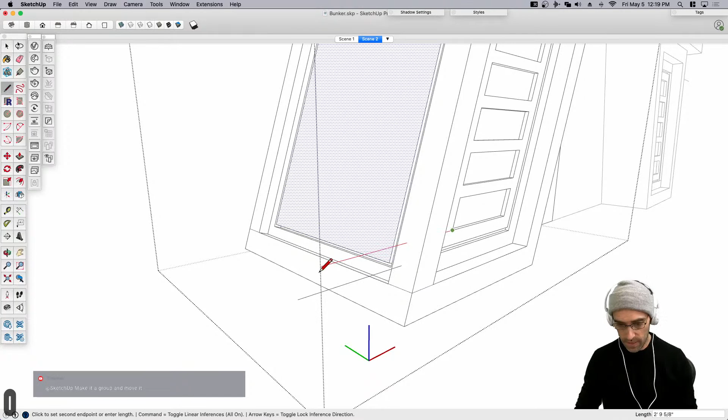In fact, I don't even want to do that yet because I want to push this in just a little bit. Then I want to offset to about here, and then here. I want to push that in. How did I do it on this one? I didn't do it on that one, I pushed that one in. Then the last thing I want to do is draw this line here, and that tells me where that offset generally is.

If you can't see what I'm doing, basically if you draw that little intersection point, that's just telling me when I offset this face, snap it to right there. So I'm just drawing these temporary reference lines that I'm pulling from the side, because otherwise how else would I do this?

I'm totally open, I'm totally open to new ideas. So in this case I do the same thing — I need one of these modules.

Ransom said, you could group and move it. And Antonio says, are those walls 90 degrees or are those corner pieces 45?

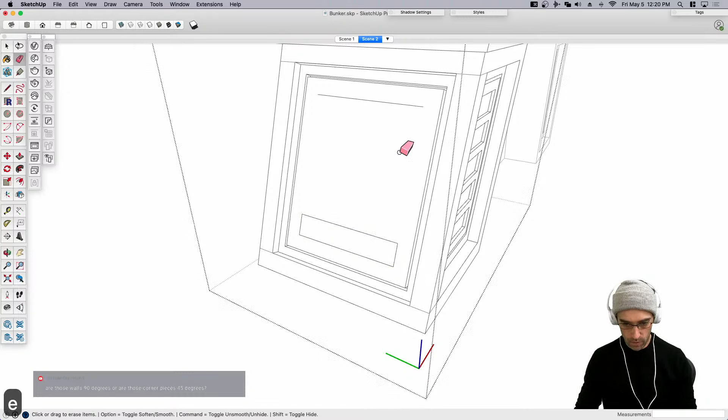I'm not sure which corner pieces to use, because there's a lot of corner pieces. Well, I'm working at an angle now because I already tapered. I'm just going with that because I want to do this quick since it's kind of in the background anyway. It's kind of covered, I just need something that generally feels like it fits the shape. So I'll pop that in a little bit.

I also need something that has a little bit of detail, because if it's just line work, it's not going to render well. You want enough detail on it so that when you go to render, you're getting shadows and things like that.

Let's go to our watermark view. If I turn this off, you can see that's what it looks like. And if I turn this on, I think this part here - I don't know if I can do it now, it's probably too late, I should have done it before. But I think this is actually at an angle, so this is where I'd use the box tapering or something like that, or Fredo Scale. I'm just going to go with it.

I've got some plants on there. It looks like there's something that looks like maybe some sort of radar dish.

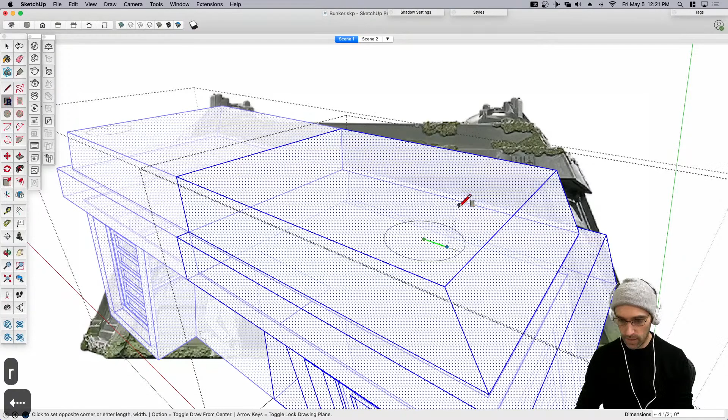I'm going to use Tyson's technique. Tyson taught me early on in my career that if you're going to do Follow Me, and you have a really specific shape you want to do, you may want to draw a plane first, because otherwise it's really difficult to see what it is. You could actually be drawing the profile of the Follow Me onto something you didn't want to. So in this case, I might just draw a little reference plane first.

And there we go, Bob's your uncle. Okay, so that's some sort of antenna on it.

And then lastly, I think there are these little boxes, and I'll be done after this. If you look at them, they look like there's 1, 2, 3 in the middle, and then 1, 2 on the sides. So I'm just going to put those little boxes, whatever those are.

This one actually might be one where I want to round the corners off. So here's how I'd do that. I would come in here, and without an extension, I would just divide this whole thing in half, and then in half again - I'm only doing it once.

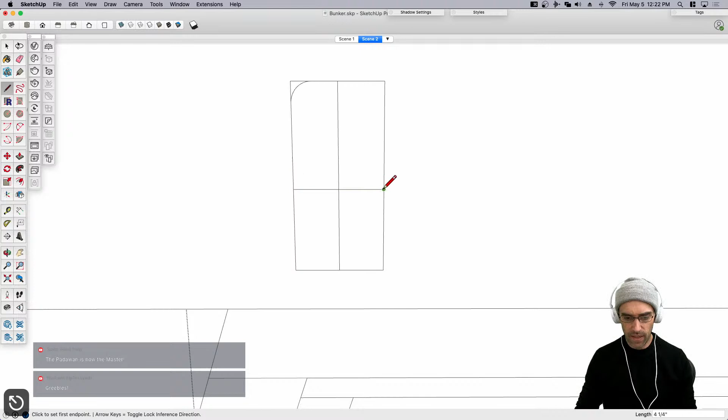And then I would take this and go 360 divided by 3 - nope, divided by 4 - nope, that's not how I wanted to do it. I would have to do this instead. I would scale it, -1. Whoa, what did I do?

Sometimes it helps to work off to the side. I think about Tyson's boneyard that he likes to use, and as much as we give him a hard time for it, it makes sense that you just work off to the side, and then when you're ready, you bring it back in. Okay, so there we go. I'm going to make that a component just because there's more than one of them. Always, always, always - if there's more than one of it, I make it a component.

I don't even know what this thing is supposed to look like.

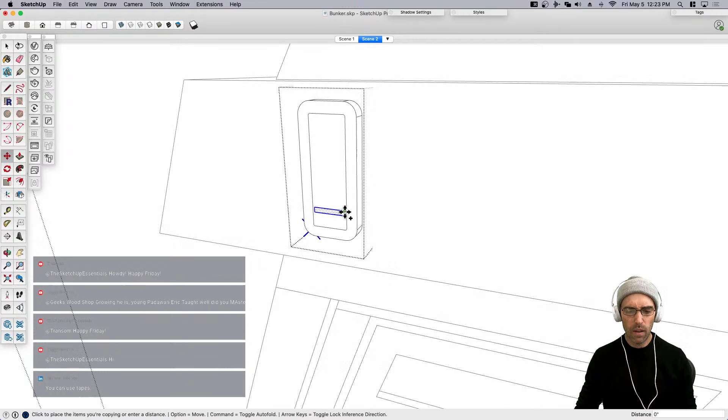Tyson also, to give him some credit, really helped me early on in my transition from working on my own projects to really thinking about how SketchUp works, and looking at inferencing, and the power of inferencing, and making sure I'm using that correctly. Tyson's the inference master. Tyson did comment, 'Padawan is now the master.'

Yep, so this is kind of an interesting technique here. Instead of pushing these all in, I could just push this whole thing in, and then those stick out, just to give it almost like greebles, just to give it some level of detail.

So bunker, that might be too big.

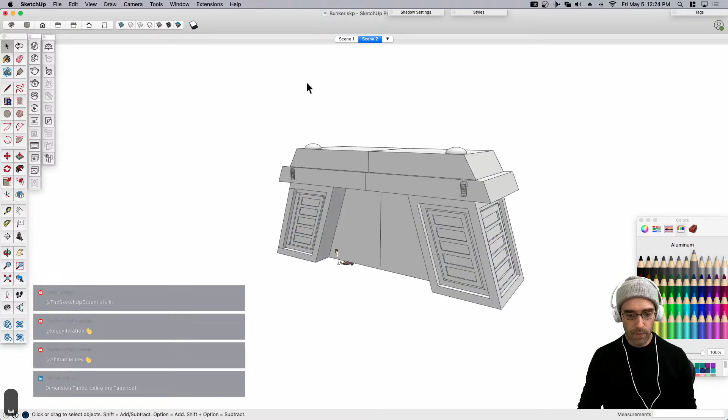I model in white. I know some of you might wonder about the all-white - I model on an all-white screen because if it has color, let's pretend I've got a color applied to it. If you have a background color and switch to monochrome mode, which is hidden line style, it picks up that background color. So whenever I switch to monochrome, I like to see it white. That's why I don't mind having a background color - it's just that I'm often going into monochrome mode, so I end up sticking with white.

So I think there's maybe two of them over on this side. I'm going to use inferencing again. Maybe make that a foot away. Nope, maybe 4 inches away. Nope, 8 inches away, I don't know. We're going to grab that because it's a component.

All I have to do, if I want to do that, is line up this middle one here with itself. I'm going to be okay with the fact that those two overlap just a little bit. That's fine, just overlap those and bing. Now you've got that middle one because it's two components, so I only had to do it once.

I'm not too worried about the door because, to be honest, I don't know that you're going to see it. I think it's going to be in the shadow. Or if anything, what I'm going to do is make sure you don't see it. Because you know what, I'm in charge. I get to do it however I want to do it.

Yep, you do you. I'm going to do me. I'm going to do me today, everybody.

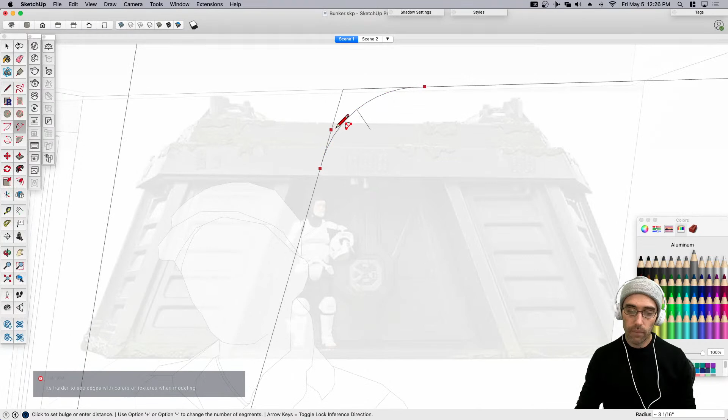No, that's actually not true. I don't like to just do me. I'm the kind of person who got into this role of teaching and training because I really enjoy the feedback loop you get when you work with people, when you work with other people. Like, yeah, I could just do this by myself if I wanted to.

Okay, what do you think? Are you willing to call? Are you happy, Donovan? As long as Donovan's happy, I'm happy. Yeah, I'm happy, I'm good.

Your screen actually froze for me, so I'm going off the audio and just listening to you work. Let me check real quick, hang on one second everybody. It shows that you're fine, it looks like it's just on my end. Well, hey, if you got to pop out and pop back on, do that, because I can carry on without you for a few minutes. I'll miss you, but we'll survive.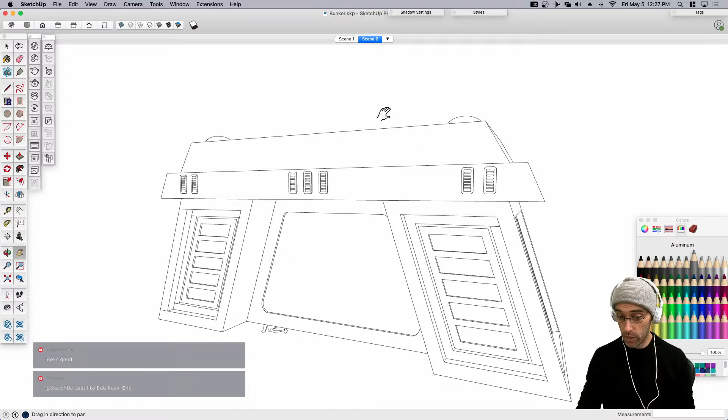Okay, so there's only one of these, but out of habit I'm going to make it a component. That one's done.

I need to come over here and get back into my main model because we're already at 12:27, and you're not going to be able to render this, you're just not going to be able to. So at this point I'm going to throw some stormtroopers in, throw some fog in, throw some lights in. We've got 30 minutes, we're going to do it, we're probably going to leak a bit.

I'm going to say this, I learned this term 'leak.' That's like when a meeting, like a Zoom call, goes over. We might leak a little bit, but not too much because I know we're all busy. We're all busy people, we've got things to do.

Okay, so let's get that bunker in there, let's get those stormtroopers in there so we can move on. I want to do that—nope, I want to do blue axis. I thought I hit inferencing. Sometimes it's funny, sometimes I hit the arrow key and it should lock to the blue. So I'm going to do 180.

This bunker feels small, I'm probably going to push the size of it up. If you look at our reference image—not that one, this one—you can kind of see it again. I don't know why I put all that detail into those doors. You may not see it, but if I'm faithfully reproducing this image, I'm going to block it in. But I wasn't trying to faithfully reproduce this, I was just inspired by it.

So I don't know where that bunker is going to go, but it feels a whole lot bigger than that. I'm going to move that over.

So this is the part where I kind of think about rendering a little bit like the hockey stick curve. Do you know what I mean? Like the hockey stick, it's exponential growth. If you lay a hockey stick flat with the curved part where you hit the puck on the right, it's barely sloping at all, or not sloping. And then all of a sudden, it skyrockets, right?

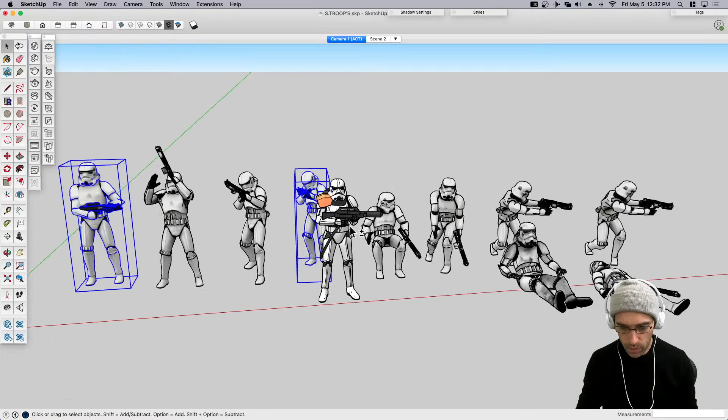Okay, these are the guys that I told you I found. I don't know which ones of these are going to work. I think probably just the ones that are standing and marching, the ones that are sitting may not work. I don't know what that guy's doing, he looks like he has to go to the bathroom, but I'm not quite sure. These guys are shooting at each other, and ultimately I don't know that a battle is actually happening in this scene—I think maybe they're just walking.

At this point, I won't need Heather and Lily much longer because they were my scale fakes, especially when I was trying to get a sense of how big some of these plants might be. So we got a couple more things I want to do before I get into V-Ray.

I want to place some of these. I don't have to place all of them. We can always come back and spend some time on this later. If we get close, that's always good enough for me. But what we could do is place some of these stormtroopers, at least figure out generally where they go. And then I want to do some vegetation. Maybe this time I can use scatter now that I have a better idea of where I want to scatter some stuff to, just scatter some ferns on the ground, so there's some palms and ferns.

I don't know why this is taking so long. I know those stormtroopers could be a bit detailed because they've got some texture maps and stuff applied to them, and they come from 3D Warehouse.

So while I'm waiting for these to pop in, it's always a great tip for 3D Warehouse. Love 3D Warehouse, use it all the time, as I'm sure all of you do. But it can be tricky because you have to really vet stuff. You have to spend some time, open stuff up, check it to see how big the files are. The stormtroopers that I found, my consolidated list was 22.7 megabytes. I don't know if that's a lot for people or not.

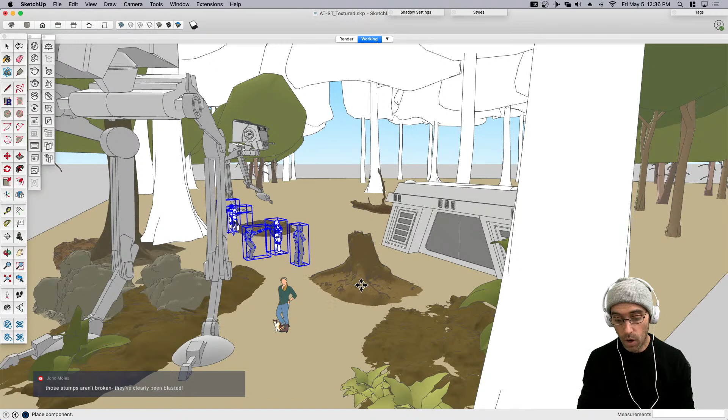So what I'm going to do is grab that tree stump since I did that segue while I was waiting for all those stormtroopers to come in. Let me just grab that tree stump here. I love the drag and drop. I don't know what version of SketchUp that was, by the way. You used to actually have to go to File, Import, and select which file type you're importing, or else it wouldn't show up. Now all you do is drag and drop it into the SketchUp window, which I just think is fantastic.

Extensions, hide the edges. Remember, just out of good habits, if you want to lighten the load, use this, it's Fredo's tool, so you can't find it on Extension Warehouse, it's on SketchUcation. So for example, for these guys here, if I just say hide edges, I can make a shortcut for that too, so you can turn them on and off. It's a really fast way to do that, and it helps keep the model light and nimble. Come over here, extension, hide edges.

Yeah, I'm excited, I haven't done this. Normally I test render constantly, but we haven't test rendered anything yet. I'm just waiting until I can place some people and place some ferns, and then we're gonna let the rendering do the rest of the work.

Let's go back. Let's come over here—I don't know where I want to place this tree stump, but I also want to cover up something. I'll place one here for now, and maybe one in the background. Maybe they had to clear some trees to build this bunker area, like he's stepping over one.

If you like Bob Ross, I like watching him paint, because it's like, put some little happy trees over here. There have been a couple of people comparing me to Bob Ross teaching. Yeah, that's a compliment. Thanks.

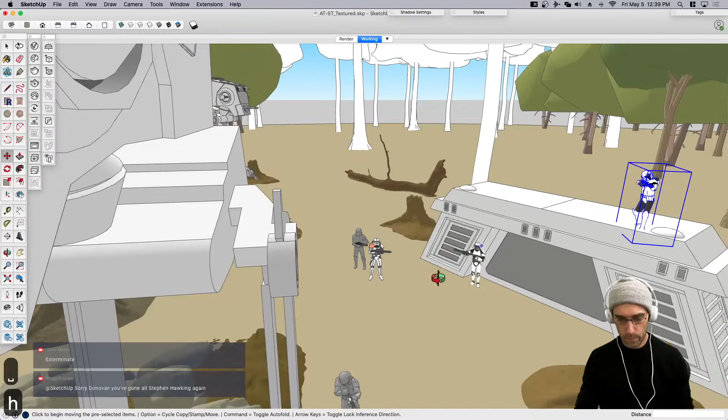If I wanted to keep things moving quickly, I could just group all of my Megascans stuff. You'll notice I haven't worked with tags lately at all on this, so that's something I normally do—I come over here and call this S-MS, then I come over here to entity info.

I do just have a conversation with myself when I do this—now I'm going to do this, and then I'm going to do this, and then, oh yeah, this would be cool if I did that.

It's strange not hearing the audience, you know what I mean? When you're teaching, people raise hands and ask questions. Here, when we do these live streams, we don't get to actually hear them, which I guess is part of what co-hosts are here for—to kind of represent the audience. That's right, you represent our audience, Donovan. So you have an important role here.

Here's the problem with these guys—of all the stormtroopers from that other model, from this one, I don't know, I would love to put more in, but man, maybe I will put one more in. Because it's going to be pretty light—you can see in that reference image I found, they had like 50 or 60 or something like that.

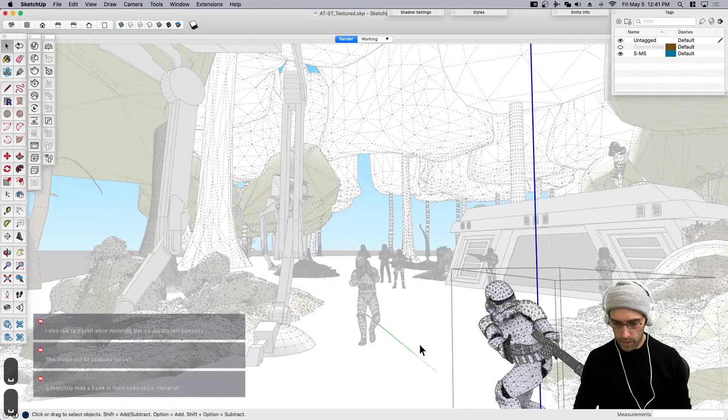Do you think I would be able to? I might just have to get rid of him, or turn him up, maybe turn him—or maybe I'll just ignore it at this point. This is kind of where, when I get late into the stream, it's like, okay, this isn't exactly how I want it, but I'm going to let this one go for now because of the time.

This always happens.

I'm going to stamp some of these guys around using the stamp tool, and then I want to scatter some ferns. This is where you can use the flip tool—I just want to flip some on the green, flip them on the red. If that doesn't work, you can always use the tried and true scale by -1. Totally fine.

All right, so we're going to do this. I'm going to create a tag for my trees because I want to scatter some ferns. So let's do that, and then we're going to render because we don't have a lot of time. I'm going to go to Window, Tags, and create one called Trees, so I can just grab all of these. I don't need any of these things on for right now, I'm just going to pop them onto their own tag.

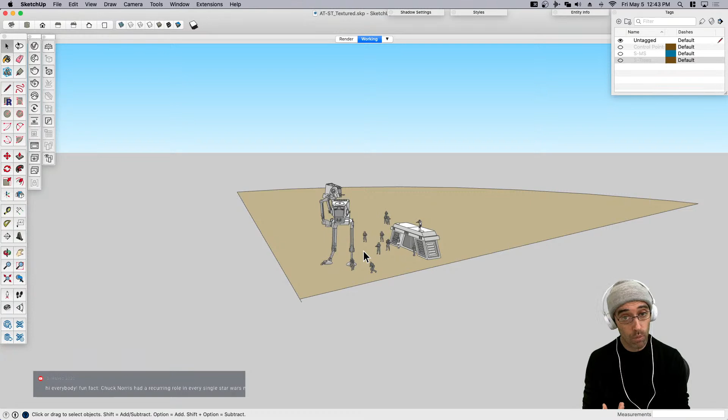This was a lot to do, to be honest with you, because we started with the walker, talking about the materials, where we started with the AT-ST, and we moved into gathering assets, which takes a while, importing assets, making sure texture maps are correct, and then building the base stage. So we're trying to do an awful lot, to be honest.

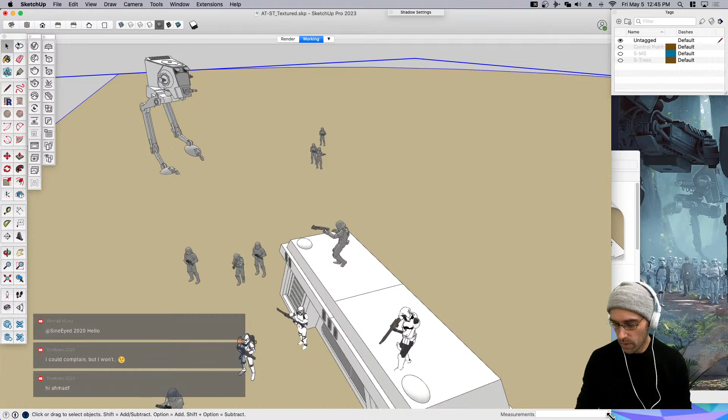All right, I can read the comments. Is Ahmad here? Hi, Ahmad. Kegi? Transom? Who else am I missing? The usual, what I call the usual suspects.

Okay, I'm not going to do it that way. You got a lot of them. Yeah, I'm not going to do it the way that I just said I am. I changed my mind because of that little crash.

So when you're working with so many different kinds of assets at different levels of poly and stuff like that, this is where things can get tricky, because we're really subdividing faces, we're parametrically generating high poly assets, we're really pushing what we can do in SketchUp. So that's really that kind of uncomfortable zone where I like to be, but that comes with a little bit of risk, right? Like Tobey Maguire says, with great power comes great responsibility. So that's what we're doing right now, trying to keep this responsibility from crashing us.

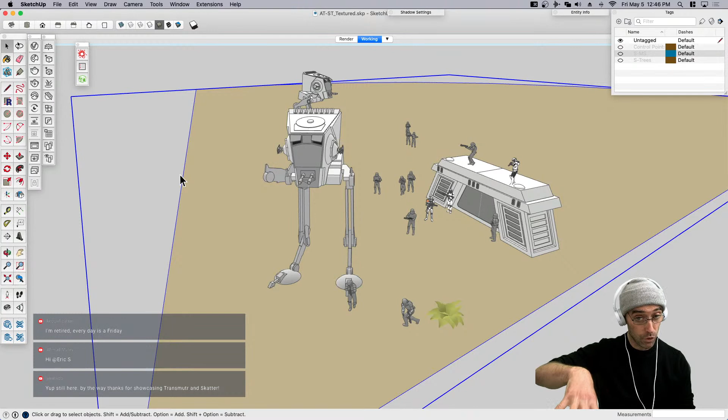So what I'm going to do instead is pop open Skatter, because Skatter has this cool function. I was thinking I could create a path first and say don't scatter everything outside of this path, or in Skatter you can come in here. The first question it's going to ask is what do you want to scatter on? I'm going to scatter these ferns on this host, so all of those red little dots represent where a fern is going to go. Then it asks what do you want to scatter, so I come over here and pick this fern, and hide help. I think I know, hopefully I know what I'm doing.

So that's the fern. Now the other thing it's going to do, it's going to ask you distribution, it's going to ask you density and all that stuff. I'm okay with all of that.

So what I want to do is, if I wanted to generate these in the model, you have to be careful because it could be kind of intense to generate that many. So I may want to bring the density down maybe just a little bit, something like 0.45. No, maybe even more, or should I say less? Something like 0.00025. Yeah, let's try that.

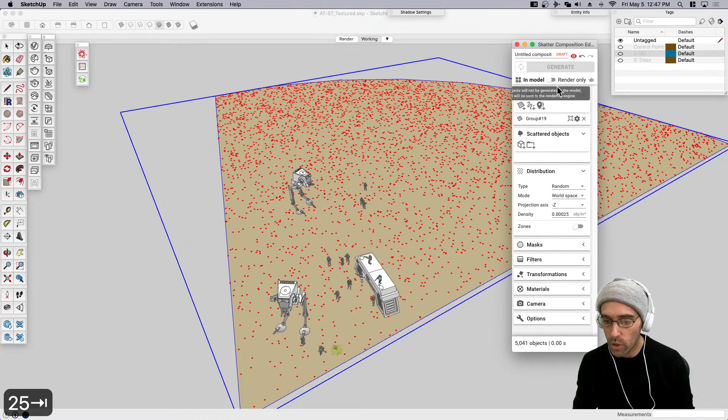So what you could do is you could pick this asset here, and it's going to preview them like that, showing you how many there are. That's a lot. So if I click generate, and if this doesn't crash, I'm going to save this first. Save. If I click generate, it's going to actually generate all of these in the model.

So this may or may not work because there's a lot of them. It did work, so that's good. So all of those are actually physically in the model now.

Now that's cool because you can see it now, but once you have everything the way you want, if it is processor intensive, you could just say render only. So I could just change it to render only and say I only want to see it when I render. Once I know what it looks like, I'm okay.

So in this case, I do want to make sure that there's this thing called a mask, and it's going to be a paintbrush mask. And so what I'm doing is I want to paint what's called, I want to exclude an area.

So in here, and I haven't used, to be honest with you, and if Thomas is listening, sorry, I used Skatter version 1 a lot, and I really haven't in a long time used it. So when you switch to Skatter 2, I never really had the time to learn the little differences in the UI. I know it's generally the same, but there are some different parameters.

So like in this case, what you can do is paint, and I want to say - I don't remember - I want to do a paint mask, and I want to make it to exclude. So I think by default it excludes. So if Thomas is on there, you can tell me if I'm right.

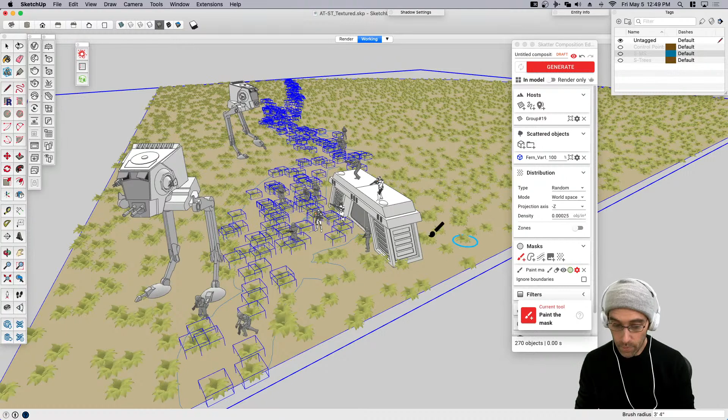Now it looks like it did the opposite though, so that was the inclusion - that was including that mask. So I'm going to do the opposite for sake of time. I'm going to come in here and just grab some of these and just take them out.

Let's see if we can create what looks like an opening in the field. There they are. Go back to render setup.

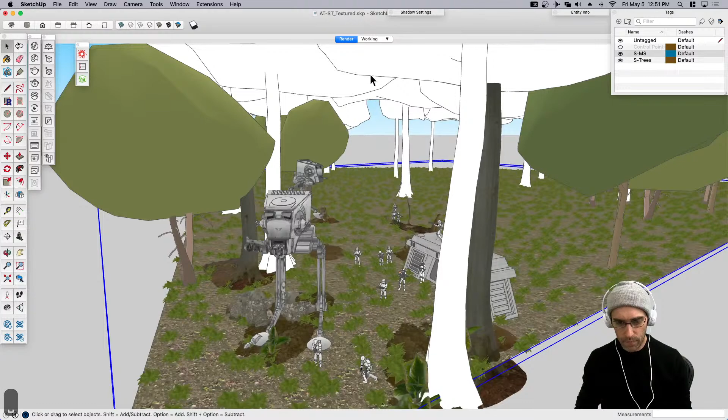Well, we're just going to have to render it as is because we're out of time. We have to render something before we go here today, folks. So we're just going to go as is.

This is not as far as I want to go. I want to do a lot more with the plants, get them dialed in and scaled, and then maybe add a rock here and some stuff there. But we're just going to spend the last few minutes throwing some fog on it. So this is cool too.

It is. What's that? You're like, hit it? I just said it is what it is. What it is at this point? Yeah.

Well, listen, I understand if people have to go. I'm okay leaking for a little bit if we have to, because I heard from Aaron and Tyson that they used to do these streams and go for like 3, sometimes almost 4 hours. I just think that's crazy. But at the same time, I could see why if you're trying to do something really ambitious, you might need that kind of time. So we might take a little bit extra time.

And tell me, are some troopers with the sludge you did? What was that? Scatter some troopers with the selection. Yeah, you could scatter troopers that way too. There's all kinds of cool parameters I don't want to get into right now, because you can randomize, cluster, tell them not to bump into each other, or tell them it's okay if they bump into each other. Sometimes with plants you want them to overlap, and sometimes you actually want them to stay away from each other. There's things like fall-offs, distribution fall-offs, so tons and tons of settings.

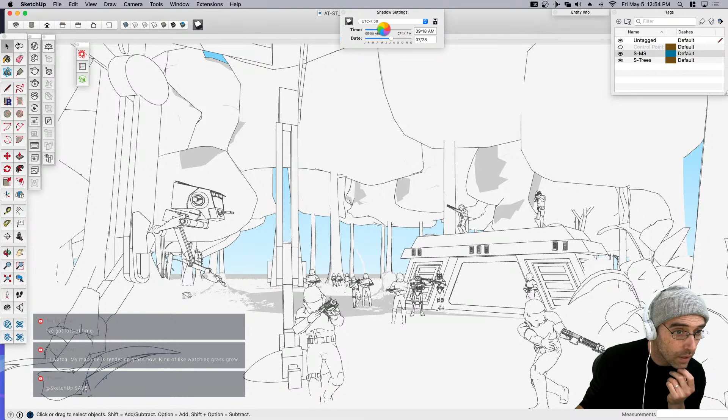And the one from YouTube says, may prior to your first run. It says, oh, I'm trying to read it. Sorry, Donovan, it's hard for me to hear exactly with a little bit of breakup, but I kind of get the gist of what you're saying.

Okay, what shadow settings are going to work here? Turn that off, I'm going to switch those off. Okay, so we need to get the time of day so the light is kind of coming in from the right, and I don't know what time of day that is, because I don't remember where my north orientation is. I can't remember where north is.

Hey, that's actually kind of cool right there. Okay, let's do that. So we're going to stylistically go with this for window styles. All right.

So I'm going to do a quick test render as what's called a clay render. A clay render is going to, sorry, I should turn my shadows off for this to keep things running quickly. A clay render is basically going to let us just look at the light by itself.

So we're going to click on my interactive render, and we're going to be rendering. Here, let's see. So this is kind of cool. I've got the light coming in from the right, and I've got the fog coming in.

So what I want to do is look at my exposure. For right now, I'm going to pop this up, although I may want it more moody and push that back down. I'm going to keep this interactive render running, because when I set my fog, I want to actually be able to see what that sort of does.